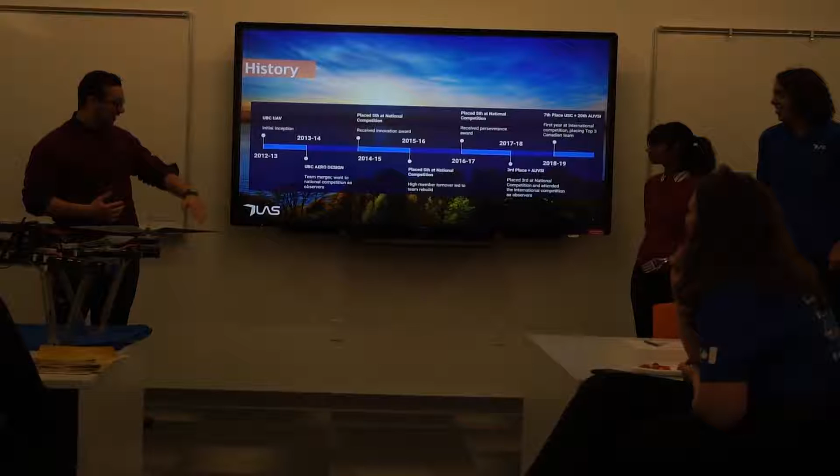It broke off of another design team here on campus, UBC Aero Design. After it broke off, it actually went back into Aero Design in 2013. So they spent a year on their own, went back in, and then decided to merge out again. That year, which was 2014, so ever since the 2014-15 year, we've actually been our own standalone independent team.

That year we placed 5th at our national competition and received an innovation award. Ever since then, we had a long run of successful competitions, placing 5th two more times, and then placing 3rd at nationals, and participating in or attending the international competition as observers.

So we actually had an aircraft lined up to go. We had an unfortunate crash, but we managed to get an overall look at the competition. From there, we participated in it for the first time just this past year in 2019, and managed to place in the top 3 Canadian teams internationally.

So now I'll pass it off to Karika, who will talk a little about our recent accomplishments.

These are some of our past accomplishments. Here's Desert Hawk, that's our fixed wing project from 2017. This is the project that Adam was just talking about, which crashed a week before competition, unfortunately. But we've got some more projects.

We've got Raven over here. This was a fully carbon fiber frame, booms, as well as propellers. The idea behind Raven was it was supposed to be a network relay, so all of our communications could be extended to a longer range.

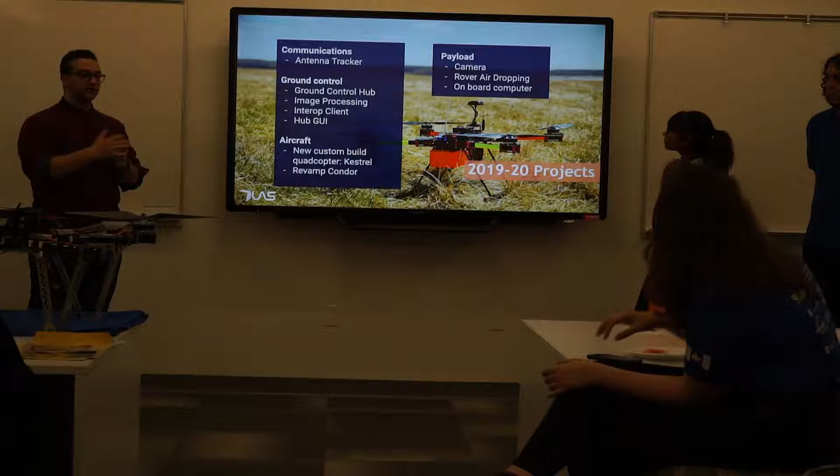But building off of that knowledge, we went ahead with our 2019-2020 project. As I said, we have our 4 sub-teams. Radio communications, which focuses on our antenna tracker. This is a device that allows us to use directional antennas to enhance our long-range video and image transfer.

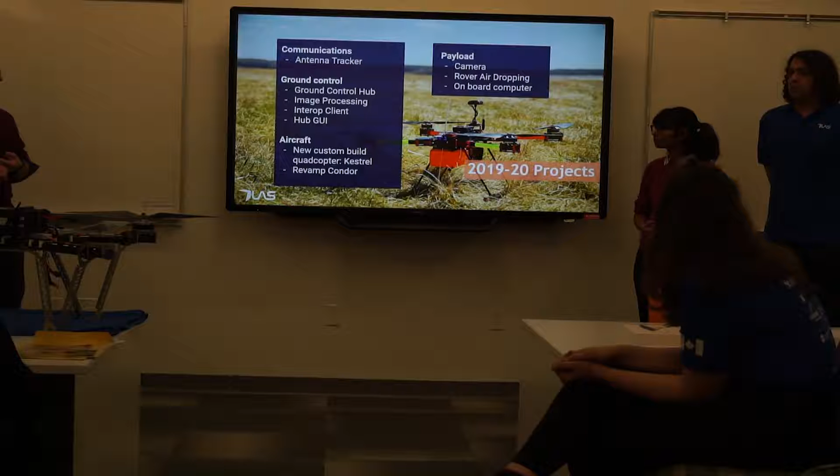We also have our ground control software suite. It handles most of our image processing, connecting to the competition server, and basically glues the entire system together.

We have our aircraft. So this year we'll be building a brand new aircraft named Kestrel, and this is to hopefully achieve the greater range requirements presented by our competition.

And on our payload systems, we'll be focusing on specing a lighter camera, having a successful rover airdrop, and as well that includes the winch, so the entire airdropping mechanism. We're going to be doing all that with our onboard computer.

We've got 2 very exciting competitions that we go to every year. We've got our Unmanned Systems Canada competition. This is the national one, and we compete against 14 teams every year.

This year, the scenario is really interesting. It's a medical emergency in the rural communities of Manitoba. The idea is the ground between the delivery location and the clinic is inaccessible by land, and so we want to deliver these medical packages.

We've also got AUVSI, which is our international competition. We've got another air delivery scenario in here. We're gonna perform 3 components in this competition. I'll talk about them in a second.

But the focus in AUVSI is basically on systems engineering and automation. The idea is at the start of your mission, you press one button and everything needs to be automated, and the whole system just needs to finish the mission by itself and successfully deliver the package.

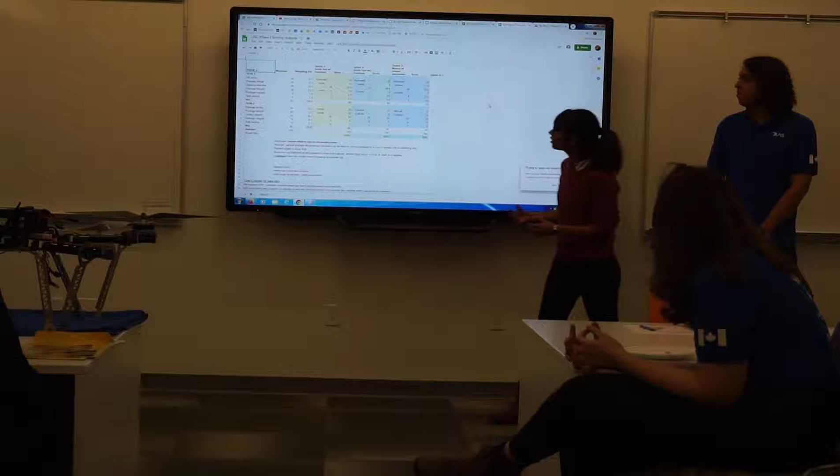And lastly, we've got an airdrop component. So we're gonna have an unmanned ground vehicle, a rover, attached to the bottom of the drone. The drone's gonna fly to a specific location, deploy the rover, and the rover is gonna drive up to the actual delivery location. So again, for USC as well, we do the same thing. We look at where we wanna maximize our points, where we wanna achieve autonomy, and where we wanna do tasks manually.

Of course, our aircraft team and payload team will talk about that shortly.

Awesome, thank you, Karika. So a lot of our projects that I spoke about earlier are drawn from the competition requirements that Karika just mentioned. However, with that, we encounter several design challenges within these subteams.

First, focusing on communications, antenna tracking enhances our radio communication. However, radio communication in itself can be a little unreliable at times, so it can be really tricky to work with. In fact, it's the most common component to fail amongst teams at competition. Luckily, we were able to create our first fully functional antenna tracker last year, so we're building off of that this year. However, it still proves to be quite the challenge.

With our ground control software suite, one of the biggest challenges we face is ensuring appropriate cohesion throughout the entire system and making sure that everything's integrated properly. This can be countered through a lot of mission testing that we do.

On our aircraft team, as Karika mentioned, we have waypoint flights, which have longer ranges. This year that actually increased by about 50%. So in that sense, reaching those longer ranges and being able to provide the appropriate power and propulsion to get there can be relatively difficult.

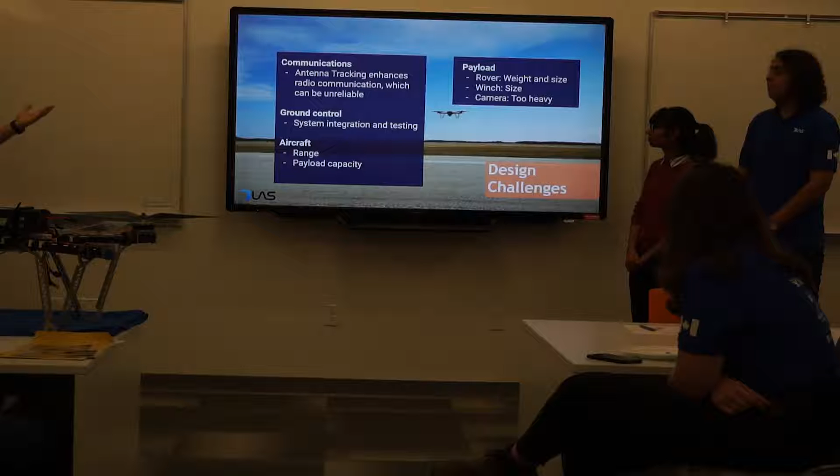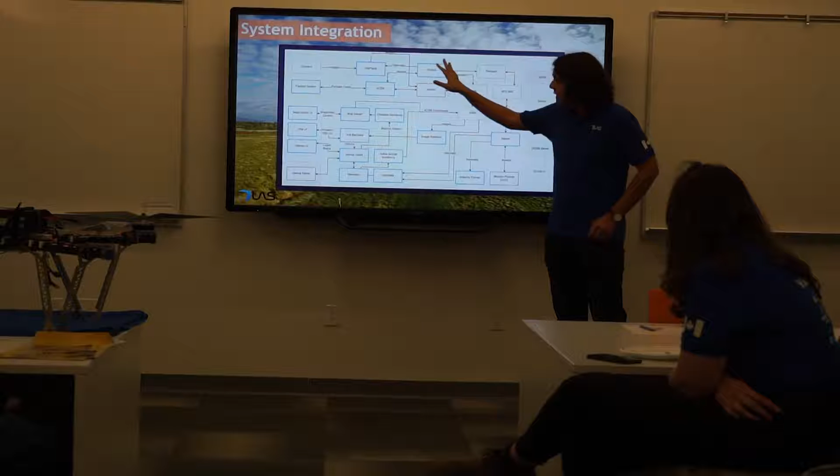So now I'll pass it off to Eric, who will talk a little bit about our system integration. Yeah, so I'm just gonna give a brief overview. Here is actually a stripped down version of our system map, and it's just all the little blocks of software that hold our system together, as well as their accompanying hardware components. So all the blocks in blue are pieces of software that we here at UAS create, and the non-blue blocks are either hardware or third-party software that we use.

So you can see up here is the most important thing: it's our flight controller. This is the brains of the aircraft, and we communicate through a proxy that we made called Skylink. It acts as sort of a proxy / translation service, and it allows us to get telemetry information from the flight controller, which is used by the antenna tracker to track its location, as well as in our ground control suite.

So our ground control suite is just a web server application that presents us with a few UIs and acts as sort of the central hub of communication between us, the team, our system, and the competition servers that we connect to. We also have all sorts of other utilities.

Called SkyPasta, which triggers the camera, takes the images, tags them with their information, and serves it to the ground. We have Air Command, which allows us to remotely control and guide the aircraft, in addition to what the autopilot already provides, and all sorts of other various telemetry and avoidance utilities.

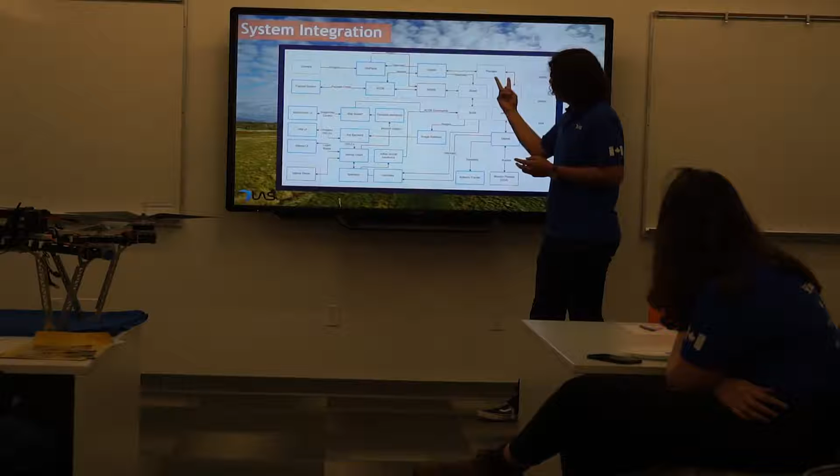And the big theme this year was redundancy. In the past, we've had communication failures, and since telemetry is such an important part of our system—it scores us points, it lets us know where the aircraft is and makes sure that it's safe—we've gone for 2 radio links. They run on different frequencies, they run on different technologies, but anything that uses telemetry can aggregate from both links so that we always have a fail-safe.

Thank you, Eric. So with that, that sort of concludes our introduction. I hope that gave you a brief overlook of what UAS is, who we are, our competitions, and what our focus is, as well as a little bit of an introduction on our system. So now, just before we hear from Oliver and our aircraft team, are there any questions I can answer?

Can all students of UBC participate? What if you graduate, do you just drop out of the team?

Well, on our team we're allowed unlimited undergraduate students to participate, and we're also allowed one graduate student. But technically, everyone on the team is a student at UBC from any faculty, so it could be business, arts, or applied science makes up the bulk of our team.

Awesome, so I'd like to welcome Oliver and our aircraft team, and they'll go ahead and talk about our aircraft team for this year.

And all the UAS members here. I'm Oliver, and I'm the aircraft lead this year, and these are my colleagues. I have Sean, Matterjot, Nick, Grant, and Sahil here.

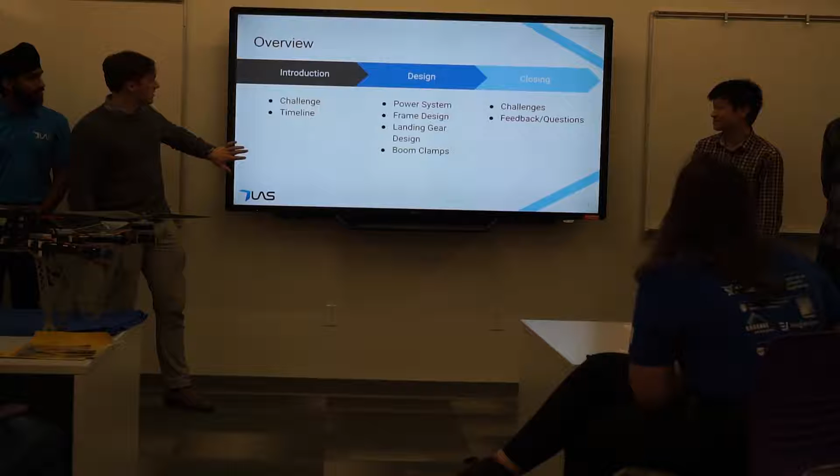So this is a brief overview of what we're going to be doing today. I'm going to start with a little bit more in depth about our challenges and specific problems we're going to be facing this year. Then I'm going to go into more of our detailed design. We'll have our team members introduce each of the parts that they're working on. And then we will also go into some closing, where we can summarize the challenge we're facing and get some questions and feedback.

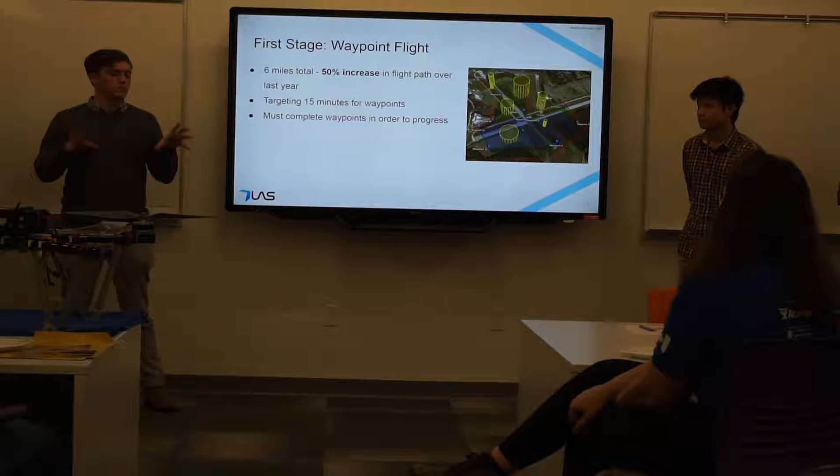So for the first stage of the competition, which is the waypoint flight, this is up to a 6-mile waypoint path, which is a 50% increase over our flight path last year, which was 4 miles. We're targeting 15 minutes this year to complete our waypoints, so we have enough time for the second 2 stages of the competition, which are the object search and drop. We must complete the waypoints in order to progress. We can't skip over these, and once you've done this, we'll have more time to complete the rest of the sections.

So for the second stage, there's an object search. We have a camera attached to our drone, and that's going to be looking for up to 20 objects, and there's 2 different types. One of them being a standard object, kind of a bright painted letter, and the other one's kind of an emergent object, which is typically like a person doing an activity of interest in the field. One of them is also located outside of the fly zone, so we have to have our camera be able to reach outside the scope of where we're allowed to fly. Then we have to get the GPS location of each object and a picture, and submit that through the interop server to the competition.

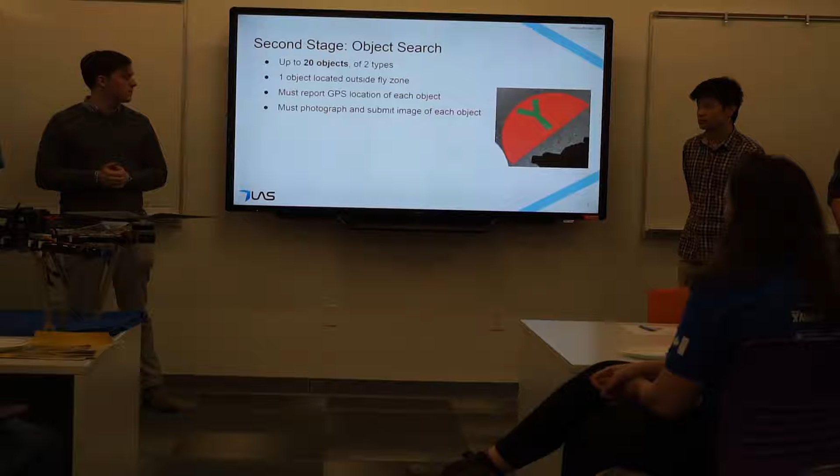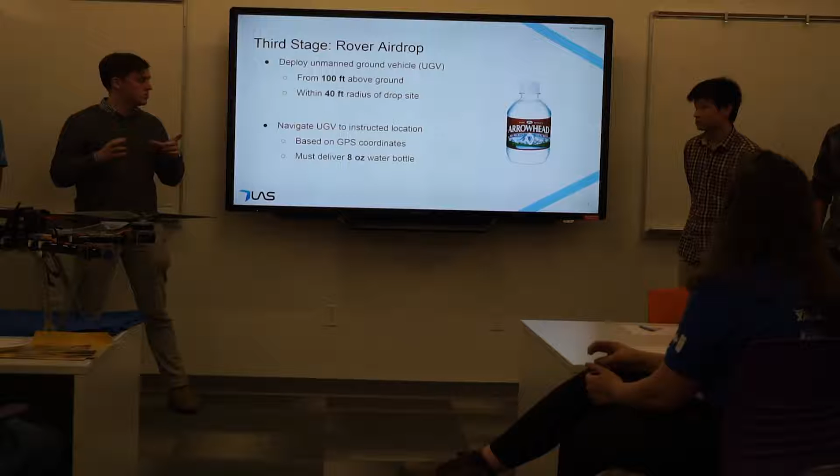From these competition requirements, we developed our own requirements. We need an 8-mile range, giving us 6 miles to complete the waypoints and 2 for the airdrop and object detection. Our focus this year is maximizing energy efficiency, which we'll achieve through the selection of our power system. We're also making it more efficient with an aerodynamic shroud to reduce our drag coefficient, and integrating the payload into our frame to reduce our aerodynamic cross-section.

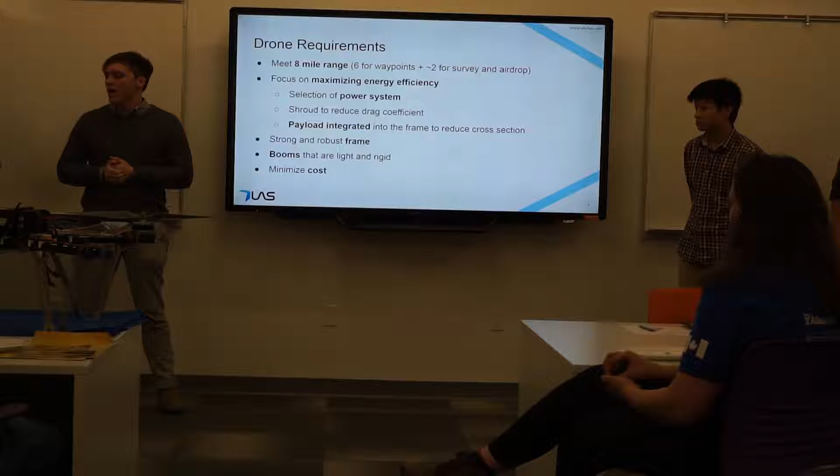We're aiming for a strong and robust frame, with booms that are light but also rigid to minimize vibration and provide predictable behavior for the flight controller. Finally, we need to minimize costs, given that we're operating on a tight budget.

This is a rough timeline for the year. Starting in September, we worked on selecting the main components of the drone. Through October, we worked on the general design, deciding the frame type, landing gear, etc. Now through November, we've been working on the more detailed design, which is the CAD of the frame, landing gear, etc., as my team members will discuss shortly. Then in December and January, we'll be manufacturing, doing the first assembly and flight tests.

In February, it'll be team integration—combining the payload, radio communications team, and software team—and we'll be working on our shroud that provides that aerodynamic shape. Then we'll move into mission tests, running the full mission, since a lot of our problems tend to arise when we try to integrate all these different systems. In March, we'll do more mission testing, integrate the shroud, and then head to competition in June.

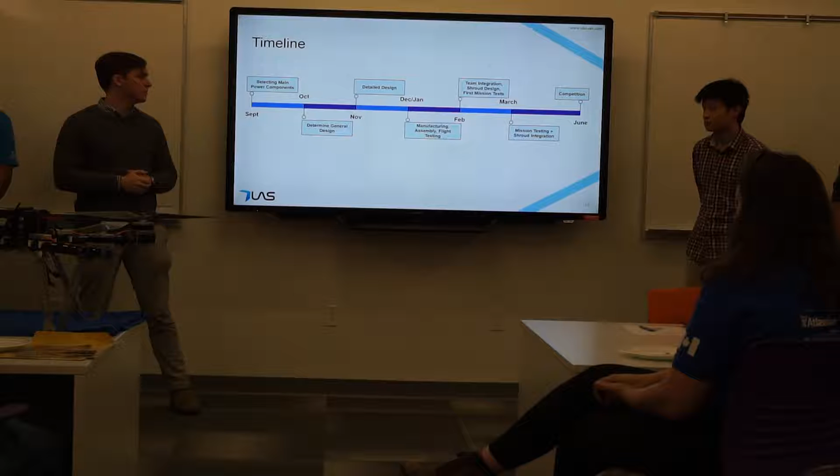Now I'll pass it off to Nick, who's going to talk about our drone components.

Before discussing how we chose our components, we wanted to give a quick overview of the different components that make up a typical drone we'd use. One of the main components is the flight controller, located on Condor right in the middle of these two batteries. The flight controller acts as the brain of the operation—it takes in all the sensor data from the GPS, gyro, accelerometer, and magnetometer, and outputs data sent to the motor and thus the propeller. Not only does it take in input, but it also sends data to the ESC, the electronic speed controller.

The electronic speed controller takes in data from the flight controller as well as power from the battery, and regulates the speed of the motor. We also have the power distribution board, used to lower the battery voltage since the battery we choose is quite large and has a large voltage. The power distribution board steps down the voltage so that smaller components can use it for telemetry, data control, and analysis.

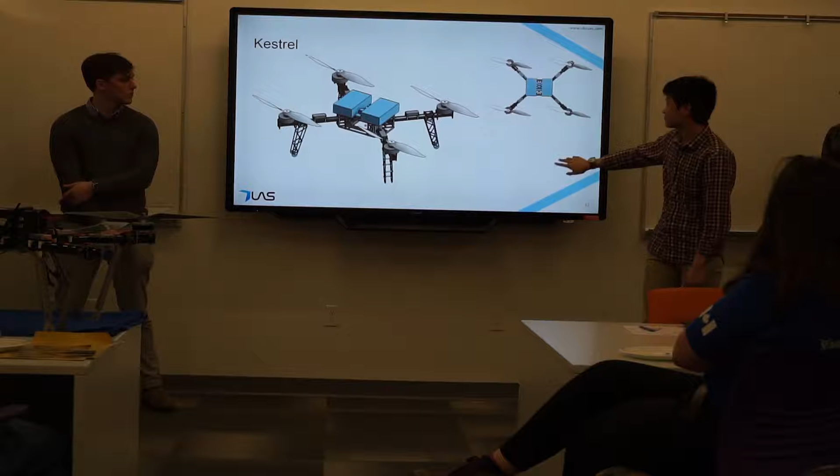I'll be talking about the different drone configurations we considered. We looked at two of the most popular drone configurations: quadcopter, which has 4 motors and 4 propellers, and hexacopter, with 6 motors and propellers.

First off, quadcopter: because it has only 4 motors with 4 propellers, it's cheaper to build and much lighter due to not having as many components. Also, because it has lower disk loading, it is more energy efficient.

Next up, hexacopter: with the increased number of propellers, it is able to reach higher speeds, and it can also lose one motor and still keep flying, giving us some redundancy, and it's more stable.

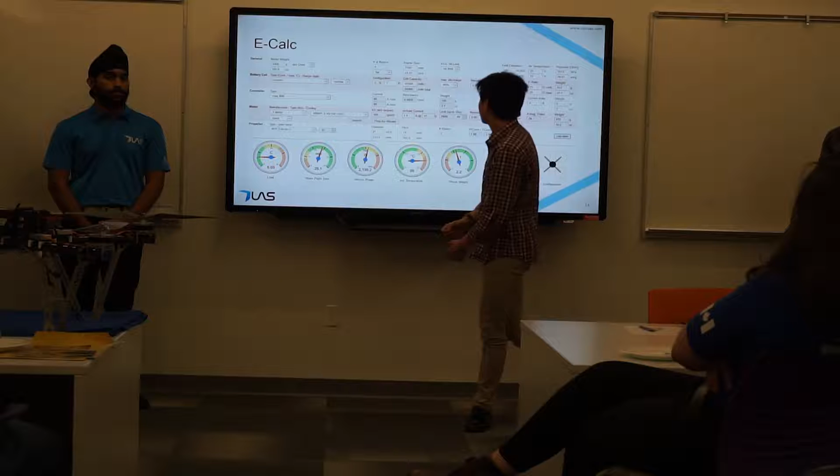The software we chose to analyze all the different configurations is eCalc. eCalc provides a friendly interface where you can enter all the different types of components, for example the battery cell size, different configurations, the motor controller, the motor itself, the propeller, and what it does is give a crude estimate of our flight time, the different temperatures, and the specific load that it can support.

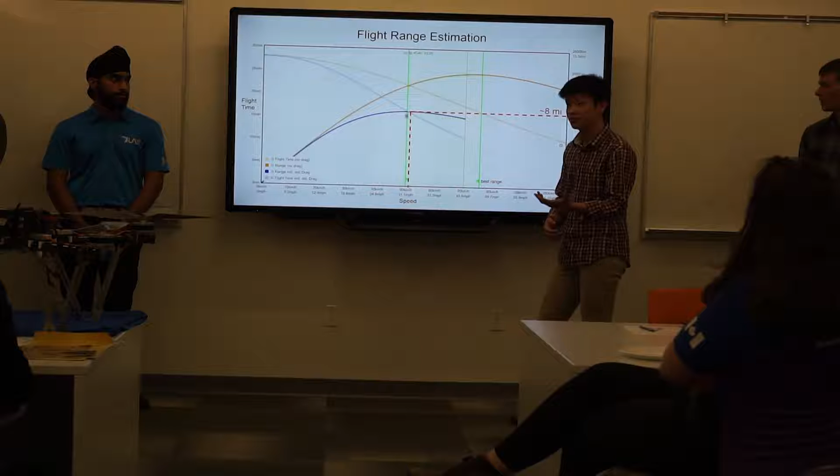So eCalc provides a very crude estimate of the range accounting for drag. The drag coefficient assumes the entire airframe is exposed and not aerodynamic, and you can still see that even with the non-aerodynamic airframe, we are able to reach a range of 8 miles given an average speed of 15 kilometers per hour. We also plan on implementing a shroud in order to increase the efficiency and hopefully improve that further.

So when building the drone, there are a lot of variables to keep in mind. One of them is the different types of propellers you can use. We broke them down into 3 categories: diameter, pitch, and the number of blades for the propeller. At a constant speed, these are the benefits each type of propeller gives us.

If we increase the diameter, it will give us an increase in thrust because there's more of the lifting surface, and because of the higher aspect ratio of the lifting surface, it will reduce the induced drag and increase the efficiency. However, rotating that propeller blade will require more torque, thus increasing the power consumption.

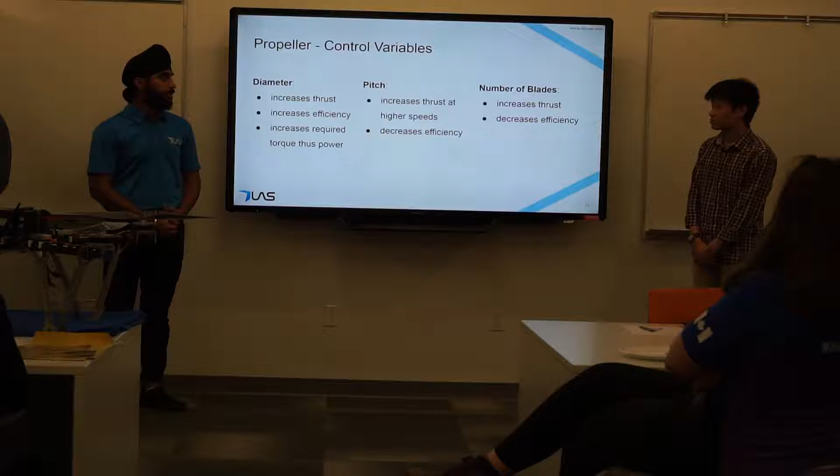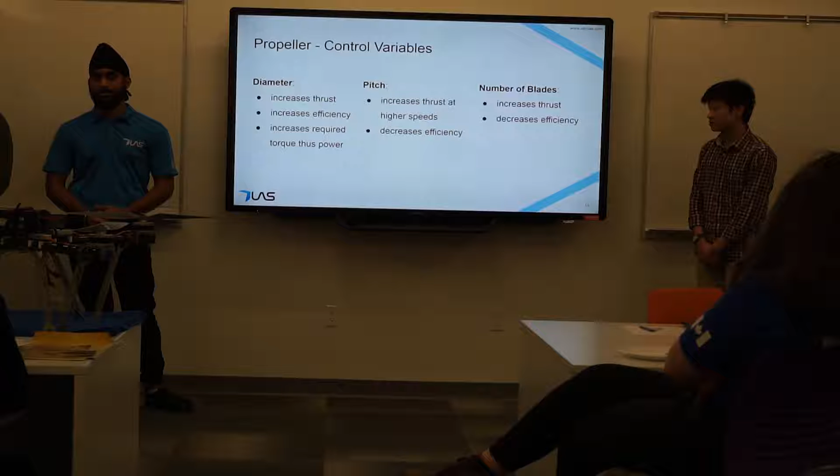Next up, we look at pitch. If we increase the pitch, it increases the thrust that propeller gives us at higher speeds, but it also decreases the efficiency of the propeller. Finally, if we increase the number of blades on the propeller, it gives us more thrust. However, it does so at a decrease in efficiency, because each blade makes turbulent air for the following blade, therefore decreasing efficiency.

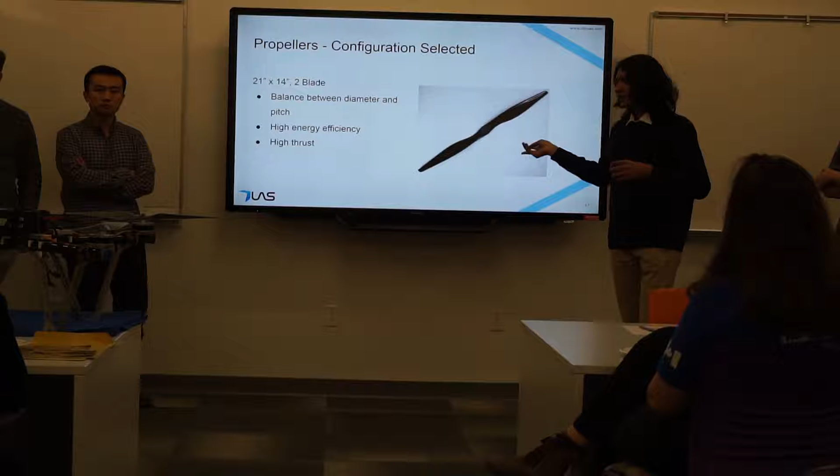When we're selecting components for a drive system, we first usually start with an initial guess for the propellers we want. We chose to use two-blade propellers for our drone this year because, as mentioned, two-blade propellers tend to be more efficient since they provide cleaner airflow to each of the blades.

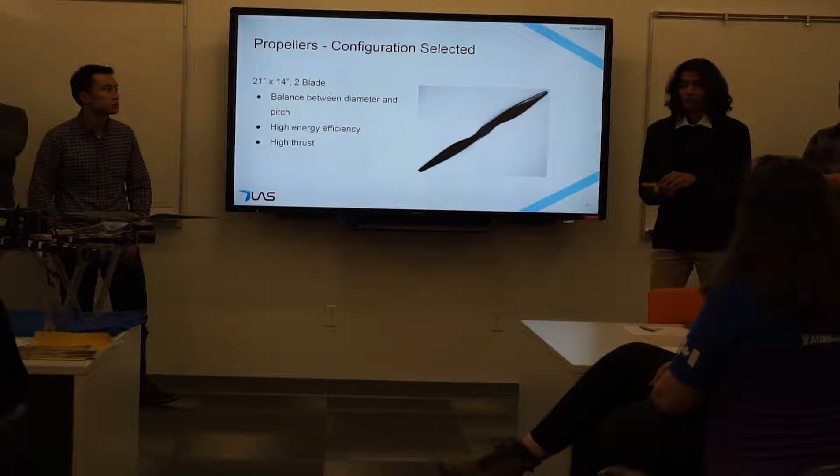Based on our design, our competition requirements, and our design requirements, we were able to determine an average flight speed that our drone needs to achieve to complete the mission. We approximated the final mass for the drone, and based on the approximation of weight and the flight speed we need, we could approximate the lifting force that we need for the drone to fly.

Using that lifting force and the data available for various propellers, we determined that a 21-inch diameter and 14-inch pitch, two-blade propeller, would be ideal to get the range that we need.

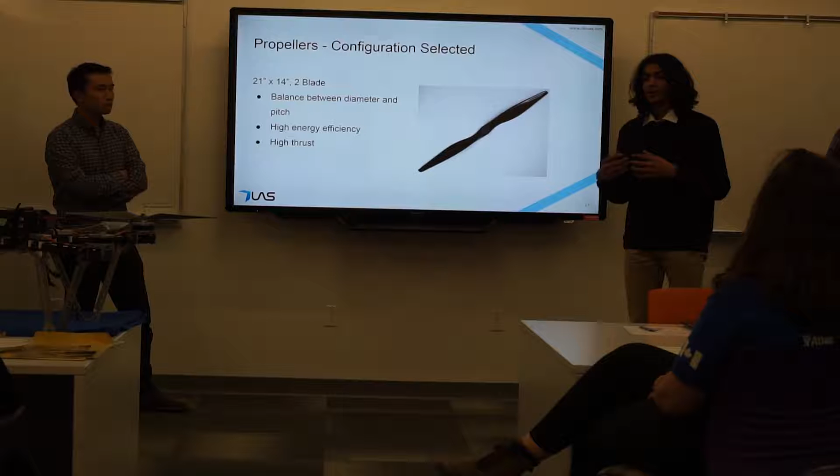Also, these specifications for the propellers were partially determined through eCalc, where we chose a propeller size, a certain battery, certain motors, and calculated the range it could give us, iterating through that to determine the ideal propeller size for a given drive power system. Yeah, so this turned out to be the ideal propeller for our range.

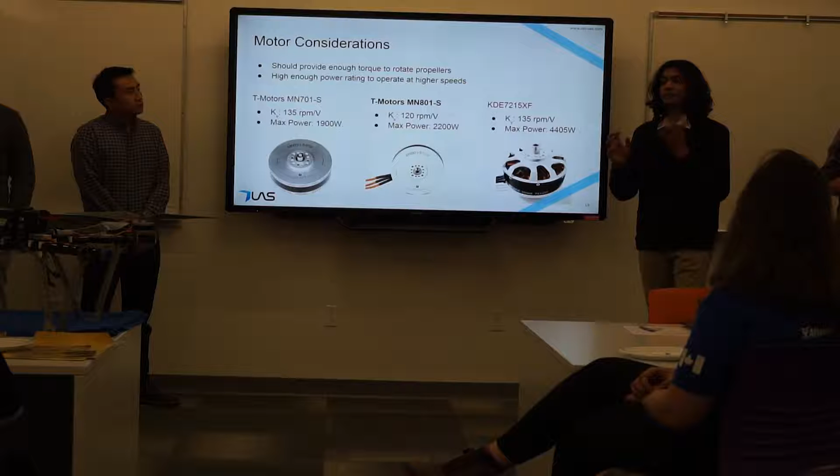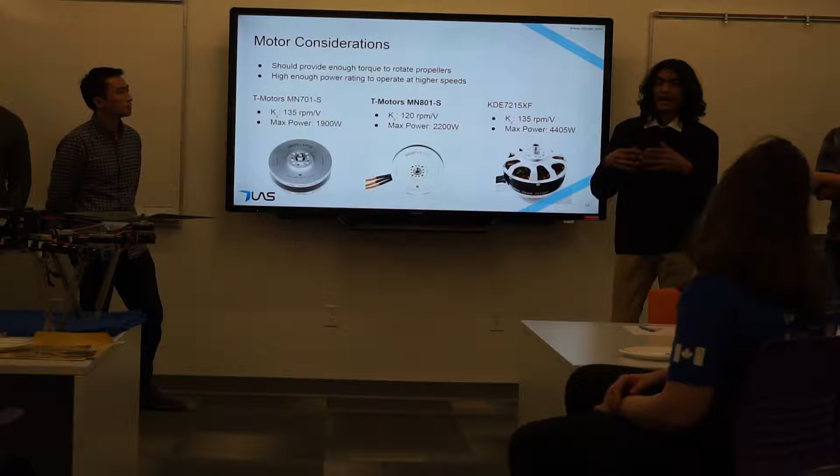So after a propeller has been chosen, we move on to choose motors. Since we have larger propellers for high efficiency and the large lift force we need, we also need large motors with high torque to power these propellers. With higher torque, we also need the propellers to rotate at a given RPM to provide the needed lifting force, which means we need motors with high enough power rating to get the range we need. These were the three motors that fit our configuration.

Since total flight time is something we have to consider, we chose the T-Motors MN801-S as the motor we'll be using on the drone, since it gave us the highest flying speed, cruise speed.

After we have the motors, we have to spec out the batteries and the capacity of battery we need to operate the motors for the given time and achieve the given range of 8 miles.

So these are three considerations that we had, and this is a 24 amp hour 12 cell battery. We chose LiPo batteries for their high energy to mass ratio and high energy density.

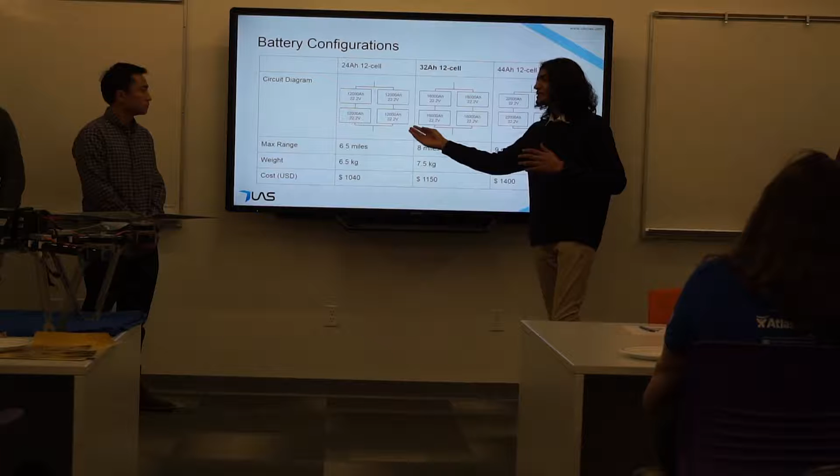Since we didn't have batteries produced that were of the size we need, we had batteries connected in parallel and series. Here we have two 12,000 milliamp hour batteries, which are 6 cells each, connected in parallel to get 24,000 milliamp hours, then connected to another 24,000 milliamp hour battery, also 6 cell, and we connect 2 of those in series to get a 12 cell battery.

Using this configuration, we got a max range of 6.5 miles, and the total weight for these 4 batteries came out to be 6.5 kgs.

Similarly, we had 16 amp hour batteries in parallel and series, and 22 amp hour batteries in parallel and series, which gave us these battery capacities. Something we noticed here is that adding battery capacity certainly increased the range for us at this point.

However, we noticed that as we move from 32 amp hours to 44 amp hours, the increase in range is just about a mile, but the increase in mass is about 2.5 kgs. So as we keep increasing the battery capacity, we also keep adding mass to the drone that needs to be lifted, which requires more battery, which requires more power.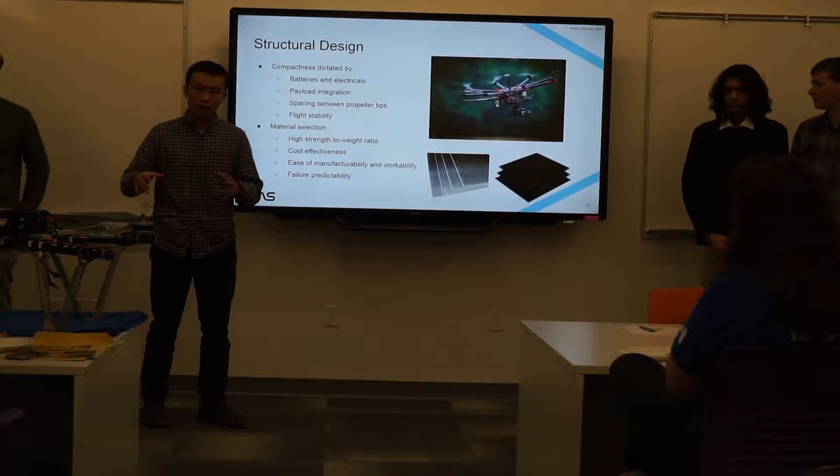All right, so next we'll look at the airframe and the overall structural system. After matching the power system to the specifications from the motor and propellers, that gives us enough speed to complete the mission in time. But at the same time, the overall size and compactness of the airframe will also affect the speed and range.

Realize that in forward flight, the thrust is working against weight in the vertical direction as well as drag in the horizontal direction. So our main target here is to be able to carry all the payloads while reducing drag, creating a very compact system.

The compactness is mostly dictated by large batteries, as you can see on the Condor, electricals, and various payloads. In particular, this year we're trying to integrate the rover or the UGV into the frame to eliminate drag.

That's why the drone frame will also be increased in size compared to Condor last year. In terms of overall size, the spacing of the booms needs to be carefully considered because we don't want any tip-to-tip interaction when the propellers are spinning at very high speeds.

Overall, the center of mass of the system and the center of lift need to be managed carefully to ensure that the flight is stable.

Another goal that we want to achieve as a team is to keep improving the overall structural soundness and material selection. Material selection is very critical in that process.

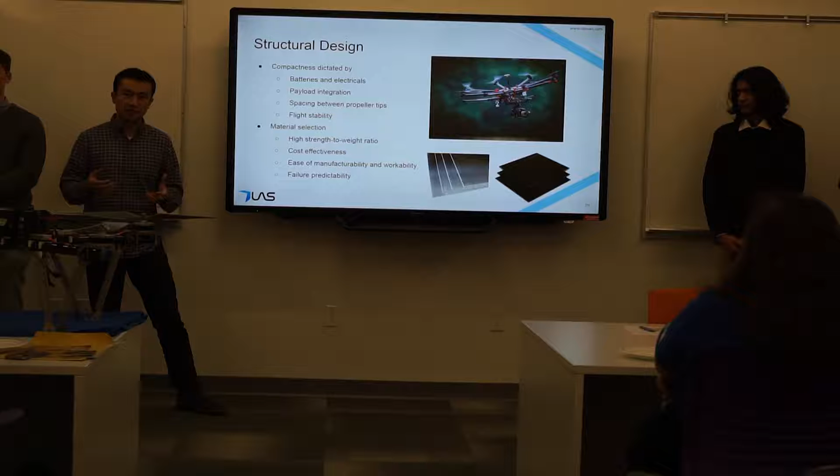There is aluminum alloy and carbon fiber sheets. These two are very popular materials in creating airframes for aircraft applications. Both have very respectable strength-to-weight ratios, but the team favors aluminum sheets primarily because it's cost-effective and very easy to manufacture for us in-house.

Also realize that carbon fiber sheets are composite structures that are hard to predict failures in, and overall analysis is more complicated. That's why we're going with aluminum alloy 6061 this year, the same as the ones on Condor.

So next we'll look at the frame design and what changes we made this year.

As we've iterated before, we need to integrate the rover inside the airframe. So this year we're going with a rectangular envelope that is 300 by 200 millimeters, elongated along the y-axis, creating a rectangular shape.

And we are continuing the success of using cutouts in all the plates. We removed up to 60% of excessive material while maximizing the strength to weight ratio.

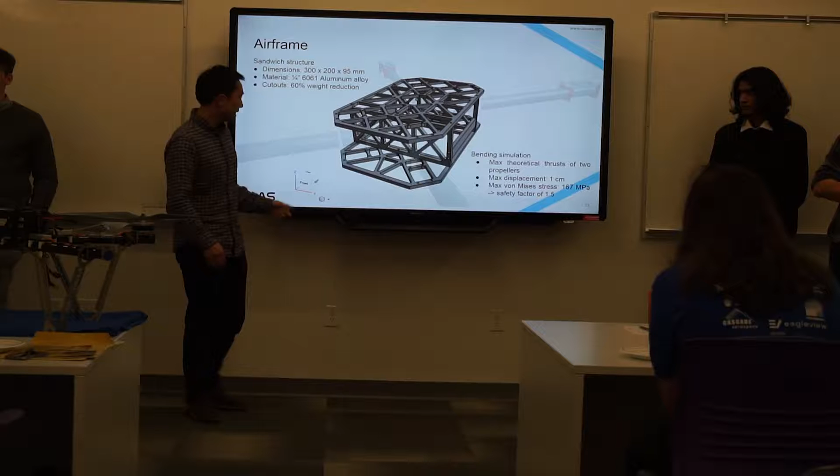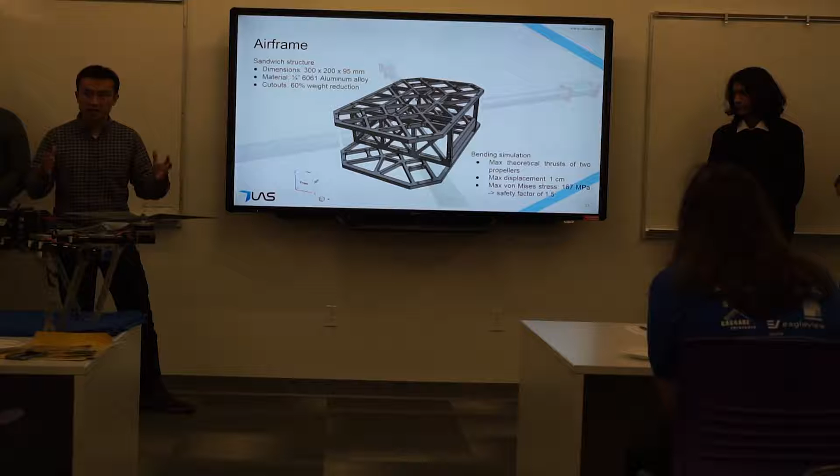We also put our frame through simulations to test bending and torsion. The worst case is bending the frame in the y-axis along its longest dimension. We saw that maximum displacement at the tip of the booms or the tubes is 1 centimeter, which we think is acceptable. In all the plates, the highest von Mises stress we saw is 50% lower than the yield strength of the aluminum alloy, giving us a safety factor of 1.5.

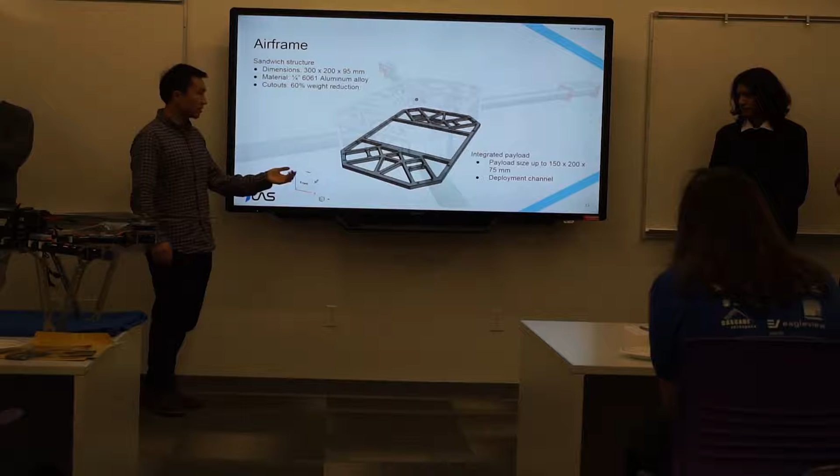This gives you a quick idea about how large we've allocated the space for payload on the airframe. It's 15 centimeters by 20 centimeters and just under 10 centimeters in height. Here we have this large channel for the air drop during the mission, the third stage.

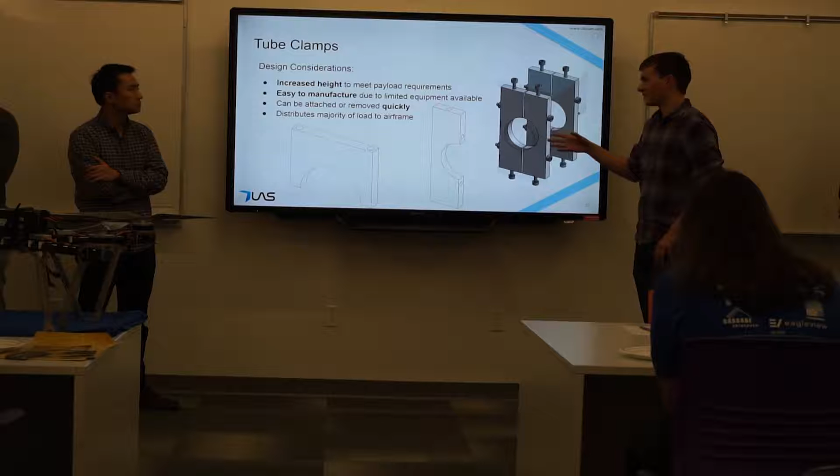One extremely major departure from last year is the tube clamps. As you can see on Condor, the tube clamps are clamped top and bottom. This time we're going with a side-to-side approach, because we need to make them taller in order to accommodate payload. Making them taller makes them more difficult to manufacture, which was proven to be a challenge last year with Condor even with the smaller height. We would have to drill farther, essentially, in order to just extend Condor's boom clamps.

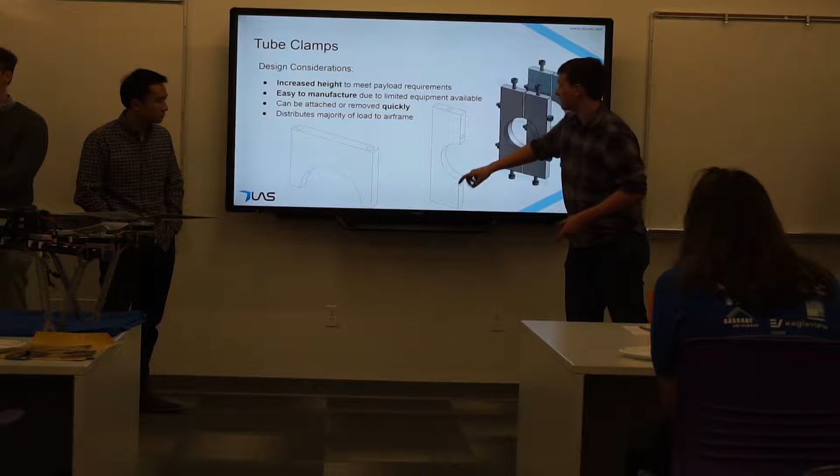It's kind of difficult to see, but there's a blind hole through the top and through holes through the sides here, as well as a blind hole down at the bottom. The blind holes will be holding the boom clamp to the frame, and the through holes will be clamping the boom itself. This design is also easier than Condor's because we can remove booms quickly and easily.

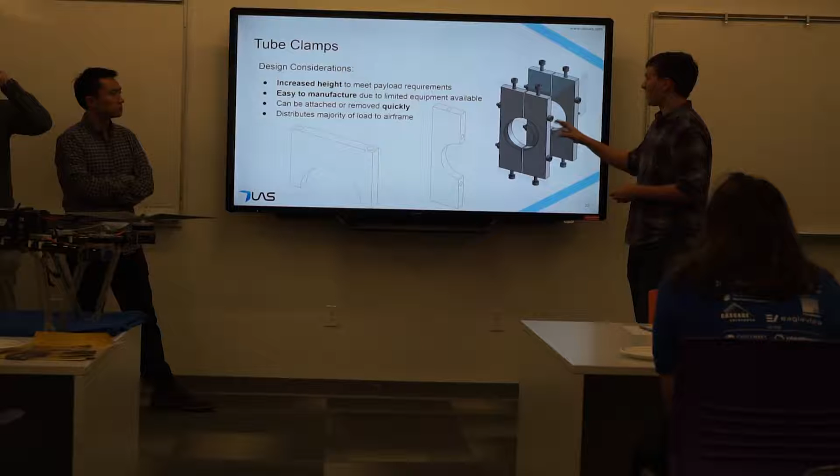With Condor, we kind of have to disassemble the frame a little bit in order to get the booms out. This will let us quickly test and pull booms in and out of the sockets easily. Through the test that Sean did, we found that it wasn't sacrificing the structural integrity of the frame by doing this easier to manufacture design.

Another component of the drone is the landing gear, as seen on Condor here. The landing gear helps the drone stay stable when it's not flying, and it also helps the drone land after a flight. So we identified five major design considerations.

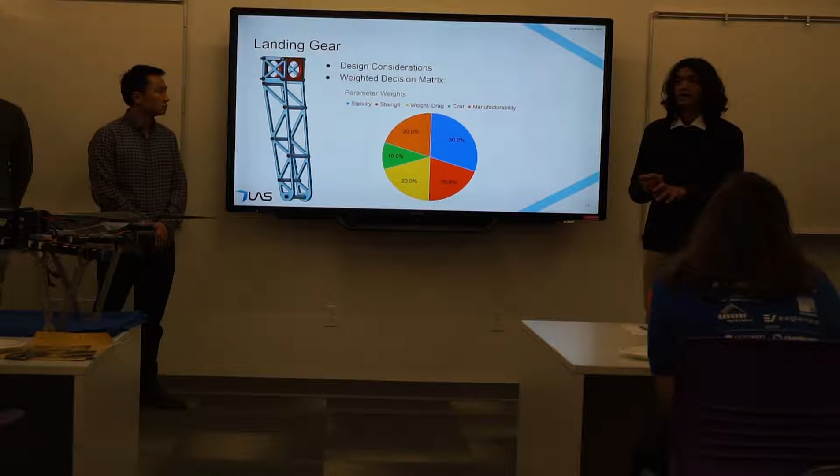The first was stability - it should be stable when it should be stable, and we wanted it to be stable on the fields, on grass, and on concrete, because we generally test our drone on the fields here at UBC, and we want it to be stable on concrete since our competitions are on concrete.

We also want the landing gear to be strong enough to handle reasonable drops from flying, or if something goes wrong and the drone drops from a reasonable height, the landing gear should be able to withstand that. Also, every time the drone lands, the landing gear undergoes some internal stress, and they should be able to withstand the fatigue cycles from these landings.

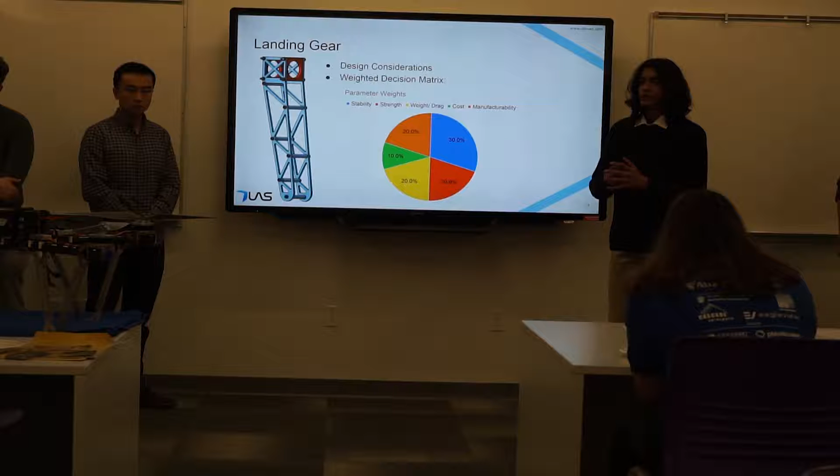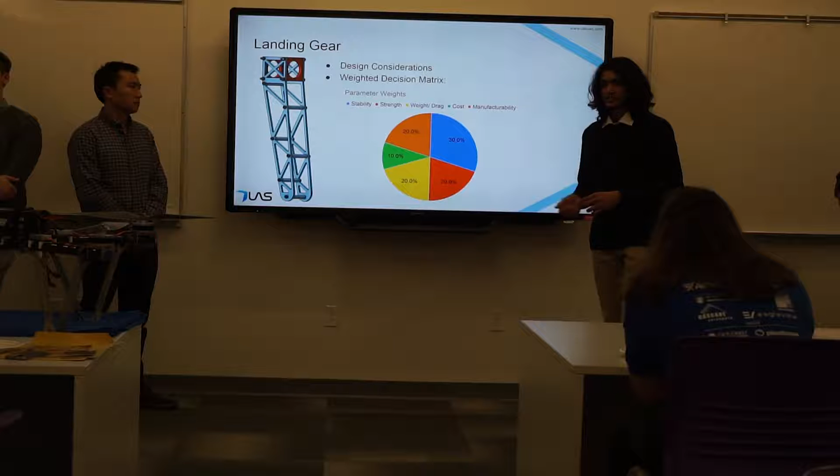Also, the landing gear contributes to the weight, in terms of mass and in terms of drag, because these landing gears tend to hang off the booms and create additional drag coefficients. So that's something we accounted for as well. And lastly, since we have limited resources, cost and manufacturability of landing gears was something we had to consider.

This gave us the parameter weights for conducting our weighted decision matrix, where the weights were determined by how important we believe each of the components to be.

So these are three design options that we had. The first one was having the landing gear we have on Condor for Newton as well. The second one was an embedded antenna.

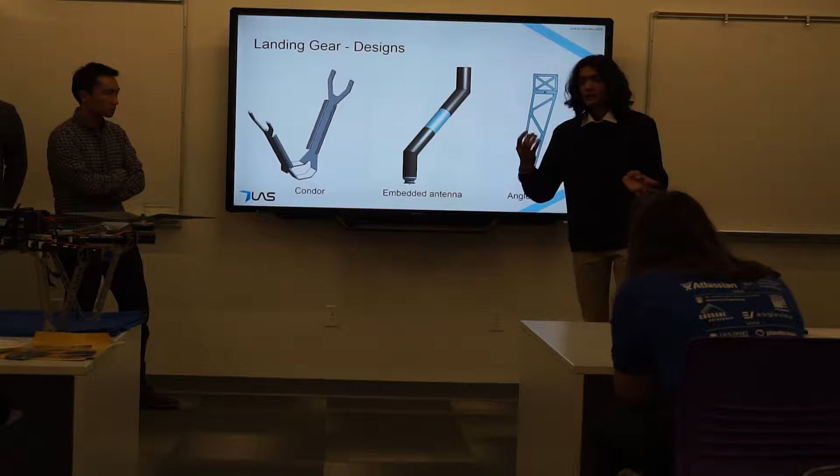On our drone, we have an antenna called the Bullet, and that antenna usually takes up quite a lot of volume. So to optimize for the volume, we were considering an option where we could have the antenna sit in the landing gear, and for that to work, for the antenna to be able to communicate, we would have to make the landing gear of composite materials such as fiberglass and carbon fiber.

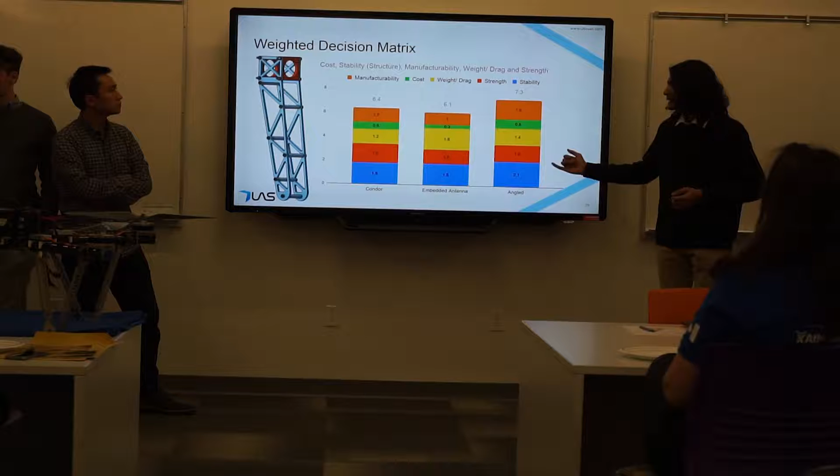And lastly, we had an angled design for the landing gear, as seen on the previous slide. So these were three designs that we considered. Considering Condor as our base case, we scored each of the three designs qualitatively on the 5 criteria we had, and we determined that the angled landing gear would be the best design for this year's drone.

To summarize the presentation, you can see our CAD model here. This year we're using a new landing gear compared to Condor. We're using a new frame with an embedded payload bay, and we're also using a new set of motors, propellers, and batteries.

Our main challenges this year are minimizing our weight, so we need to create a light drone that's efficient and able to complete the mission. We want to integrate our payload into the frame to reduce drag, but this has problems with coordinating with the other teams and ensuring everything works well within a deployment mechanism. Tying into that, we want to reduce drag with an aerodynamic frame, and that's a challenge we'll have to face down the line with how to integrate that into our existing design.

We want to have a reliable airframe that's able to withstand the typical operating stresses. And as I touched on briefly, we need to integrate with the other teams - not just payload, but also software and the radio communications. This is the crucial part of the whole competition: making sure we can work well as a full integrated system. Our final point is that we have to control our budget, as we operate on a limited budget, and we want to make sure we can achieve all of our goals.

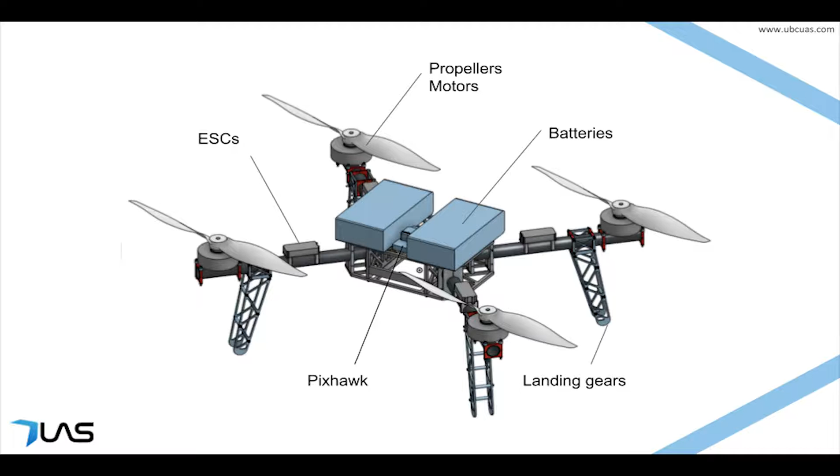It's kind of late in the game to entertain a wild idea like that, but it would be neat if you could do it. Do they have to be this high? What's the purpose of them being this high?

On Condor, the plate isn't here, but there was a plate here that held all the electronics, and then another one below that, that the rover was hanging off of. So you needed basically all this height. But on Kestrel, we're going to be doing an integrated bay, so we're bringing that height down a bit.

So you make that higher base so you could get the electronics in that box, or is that for the winch, or what goes in that core there? Yeah, so the box has the winch and the rover, or UGV.

But we could actually reduce the size more. Could you expand that center structure and bury the batteries in there? The more things you can get in that center structure, reducing the height of it, then you put your shroud on and you'll have much better aerodynamics, right? Yeah, that would be nice if we could do. We're already kind of pushing it with the height as it is, just due to the spacing between the plates.

That's something we looked at, but I think just because of the pure amount of battery we had, it wasn't going to be feasible this year. But I think that's something we would want to be looking at in the future for sure.

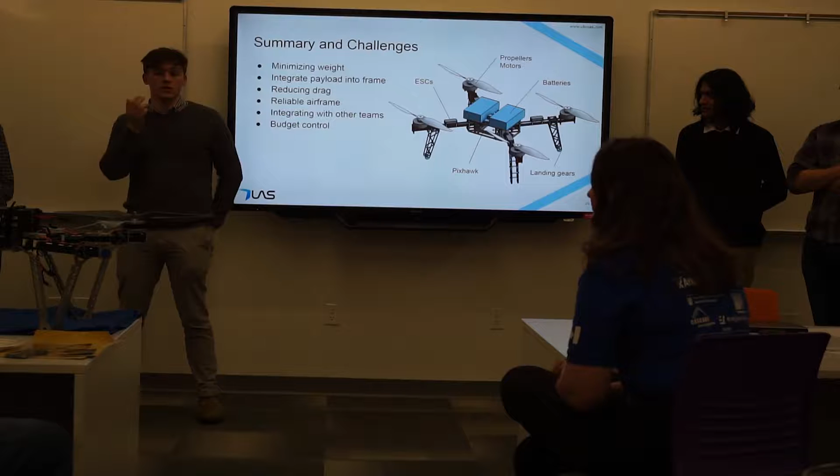But I think we definitely as a team want to get there very soon. I know some companies have started looking into structural batteries, where it's a very light frame and the batteries provide most of the support, and they can get really long ranges with that. But, yeah, that's a little scary. The first step is just get the mass where you want the mass, right?

And I guess I would challenge you on the carbon fiber, but I know if you don't have the resources or the experience, it's kind of a new area, but you can. Modern aircraft have a lot more carbon fiber for the reason you can't beat the stiffness to weight ratio, you can't beat the strength to weight ratio.

So, but it's a different technology. So you're going with aluminum. Why did you choose 6061 versus say 7075?

7075, 2024. Yeah, so we looked into that. That may be something we consider down the line. It's a little bit harder to work with, more expensive. To be honest, we have a lot of aluminum 6061 already. So then I think we just found the gains were kind of marginal.

Not marginal, but they weren't that significant. But I think we might look into rebuilding the frame later in the year if we have money left over. Well, I mean, yield on 7075 is what, got to be 50% higher? So I looked into that last year on Condor, and 7075 obviously has a much higher yield, but I found that we're mostly interested in stiffness, and 7075 doesn't have better stiffness for same construction.

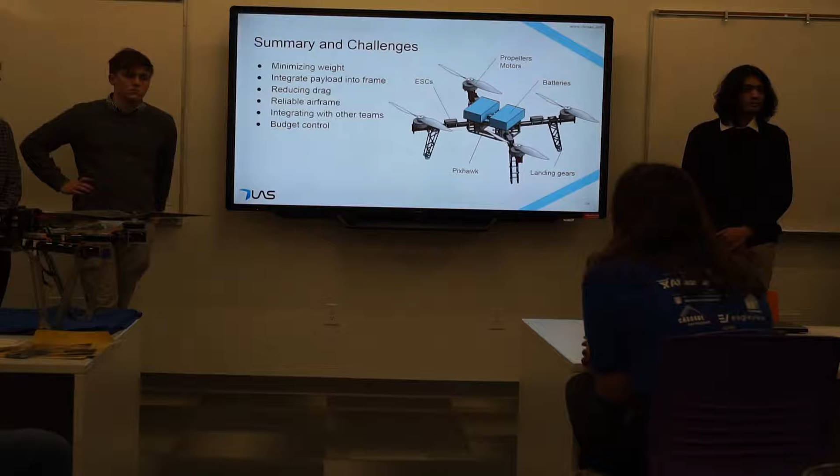So there's two things to balance there. Yeah, they definitely can be a little bit closer to the body, and they probably should be. But the other thing to consider is often, mostly in our Canadian competition, it's quite windy on the flight line, and having a wider base gives you a lot of stability in preventing the aircraft from rolling right on takeoff. That's kind of the most likely point that you roll, and I think 2 years ago, half of the teams tipped over right as they were taking off. We learned quite quickly that a really wide base in your landing gear is kind of the easiest way to prevent that.

That actually might be one of my questions from before. We were talking about your 1.5 times safety factor on the stress of the body. I'm sorry, I didn't catch what the load was that you were basing that around. Was it your cargo payload or some sort of shock load crash landing?

Yeah, so we did some preliminary FEA analysis. Basically, we consider the worst kind of bending case, which is fixing these two booms and then really bending this upward really hard, putting a lot of stresses on the frame here. The load we used is actually the maximum theoretical thrust provided by the manufacturer, and those actually use even bigger props, so much larger thrusts are generated. We use those forces, while in reality our forces will probably be far less.

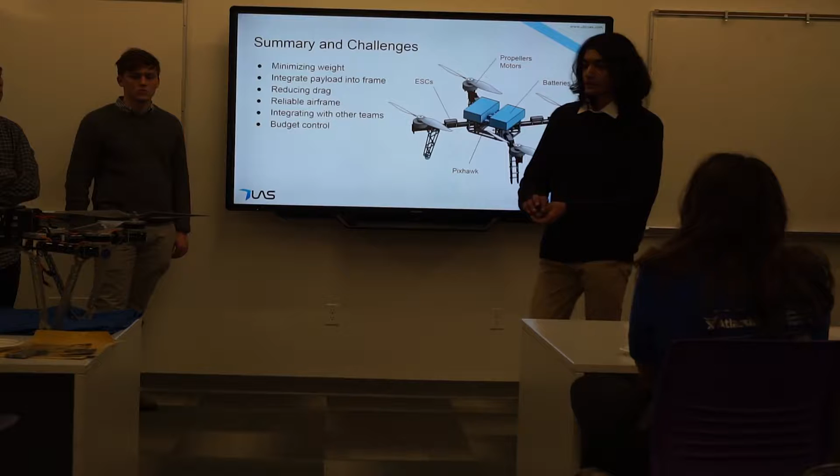How would that compare to the shock of it dropping, say, from the height of the table onto the ground horizontally? I think we did some dynamic tests on the landing gear, where we did dynamic tests to see where the stresses would be divided if we fall and drop from 10 feet. So consider the velocity that we have just before drop and conducted a dynamic test for that. And it's usually the sides of the landing gear that carry the stress, and the booms where the stresses are transferred.

So you're saying the body isn't the weak point of that? Yeah, the body, the clamps have some stress as well, but the internal frame doesn't. I think in the worst case scenario, it's going to experience the most amount of stress right here. Then this is going to just bend and deform a little bit, and that still gives us usability.

Yeah, on that maximum thrust, that's basically considering the scenario where we're going at max speed and then you want to stop or make a hard turn, because that was where we had the problem with our drone before this one with the deflection. So what does that work out to, how many G's?

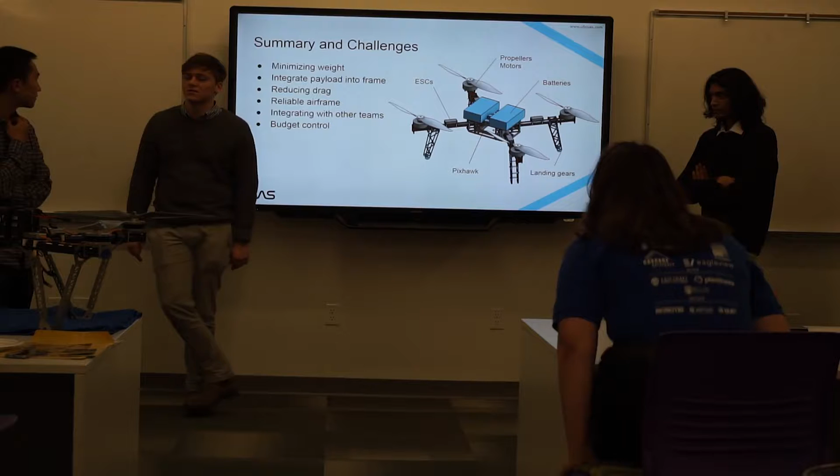What's the maximum, have you worked out a flight envelope? I don't think we did the G's yet because we'd have to do a more full simulation to get that value. But like you said, we just considered basically if it's delivering the maximum amount of thrust that it possibly can. I think we have our flight controller basically maxed out in its acceleration, and I think we get about 0.2 G. Not a lot.

Yeah, it's just that you're going to have maneuvering loads from the flare, and you're going to have lift from these, and you're going to have the inertia of that. Like typically with a helicopter, you're around 3 Gs as kind of the maximum you need to withstand in maneuvering. So you'd want to make sure that if I had 3 Gs in the center there, is that going to withstand that? The landing loads is a separate case altogether.

Is that from your drop test, figuring it out? But again, the loads are going to be different, because the G force is different when you're maneuvering versus when you've got landing loads. Those are 2 separate cases. Yeah, we definitely should do more dynamic tests. But so far in our bending test, we sort of just put all the weight on the center plates and then the thrust on the booms for now. But yeah, we should.

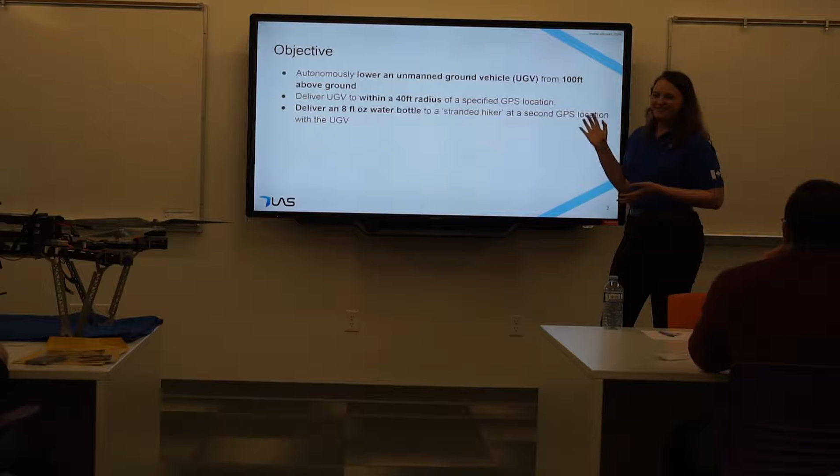Once the UGV has landed, it must autonomously go to a second location, delivering a 250 milliliter or 8 fluid ounce water bottle to a stranded hiker. You see a lot of Imperial units because this competition takes part in the US, so I do my best to convey metrics that are applicable.

Going into this challenge, we had a few priorities that would affect our strategy. Each year at competition there's been around 75 teams, this year there's 150, and we see a very low completion rate of the missions. Just getting the mission completed will get you points and get you high up on the scoreboard. We'll easily land in the top 50% of teams just getting 1 point for the mission part.

We have about 8 months total to design and build the system. We're trying to condense that to 4 months so we can focus on testing in the second semester, so heavily time limited. We wanted to focus on having something that works first before something that works perfectly. I think a lot of students fall into that pitfall of making the perfect design on CAD before trying to implement it. That's what led us to being prototype focused. We wanted to make sure the system was working, iron out any kinks, so we weren't making invalid assumptions, and just fail early so we could be successful later on.

The final priority we have is to add some UBC UAS flair. We're lucky to be a student team where we can take high risk choices and decisions in a low stakes environment, so we really wanted to use an excuse to exert some creativity. We can't expect to win and beat every team if we're doing the same thing as them, so we definitely wanted to bring a novel aspect to the design for our own enjoyment and learning experience.

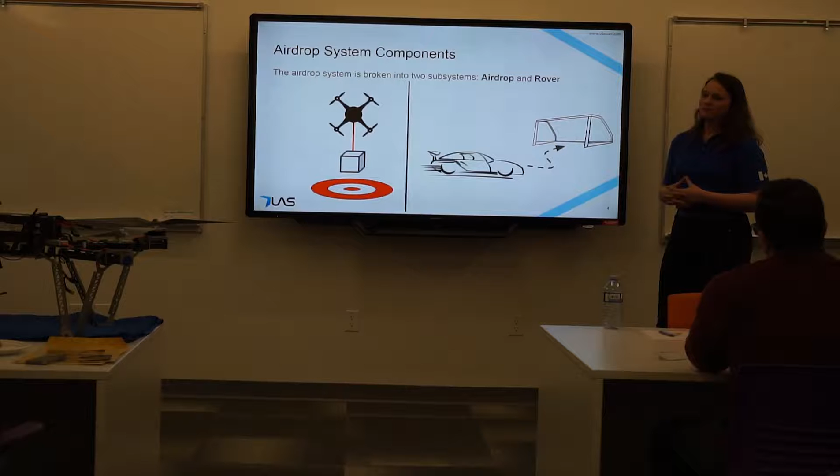And then the second one would be having a rover that once it's on the ground, it can travel to a second location within about 10 minutes, and it autonomously... Going into this presentation, I'm going to break it up into the design process for the airdrop and the design process for the rover separately, because they're quite separate.

We broke down the airdrop requirements based on the rules and some restrictions we had as a team. We wanted it to drop at no more than 1 meter per second. We estimated the rover's capacity before breaking would be 2 newtons, so the impact force at 1 meter per second would be 1 newton. We added a safety factor since it was a crude assumption. The rules state the UGV must be functional when it hits the ground to get points, and functional means it can move as intended. The water bottle must remain intact, as delivery is the essential part of the scenario, so it needs to be working for us to get any points despite drop accuracy.

We also wanted to reduce the drop time. We've had similar airdrop projects in the past and used that as a benchmark to improve upon—our drop time then was 30 seconds, so anything better is worth pursuing. There's no actual restriction in the competition rules for how fast we need to drop it, but if we take too much time, we're taking away valuable flight time. We have about 30 minutes total, so those few seconds could be used to identify another object and get even more points higher up the scoreboard, because near the top, a few points makes a huge difference.

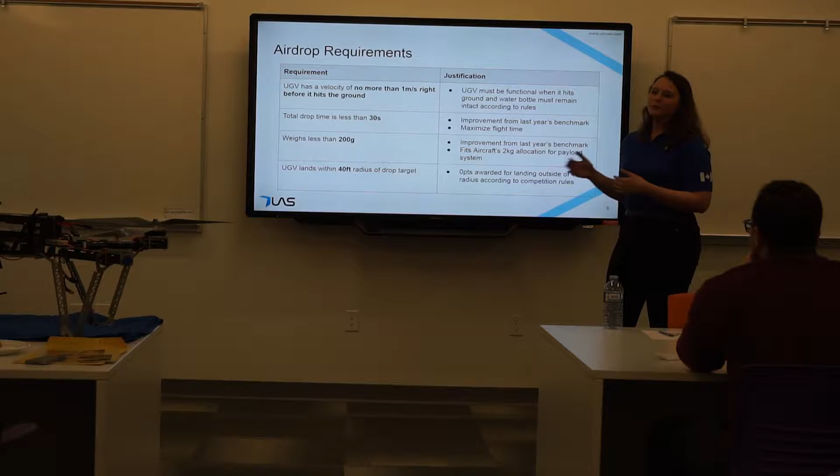It also needs to land within 40 feet—that's the 0 point mark if we're beyond that. To get 100% of the points, we have to land within 5 feet. So obviously that's the goal, but getting some points is better than nothing.

Here are some of the most competitive concepts we considered. The motorized spool is a concept from previous years, where the motor creates resistance in unwinding the spool, running in reverse to the way it naturally wants to unwind. Once the payload is released, we want to reel it back in, because as we get to the last few rolls around the spool, it loses its grip, so the rope has to be fixed to the spool and reeled back in.

The friction braking idea is a novel idea this year, where we place a rope between two braking pads. We have exactly 100 feet of rope stored, and once that falls through the pads, the drone is able to fly away without having to bring the rope back in. We would control the normal force on the rope using a linear actuator, which controls the friction and slows it down.

The other concept that was competitive was a parachute. This is something we actually tested last year—it's pretty self-explanatory: you release the rover and hope for the best.

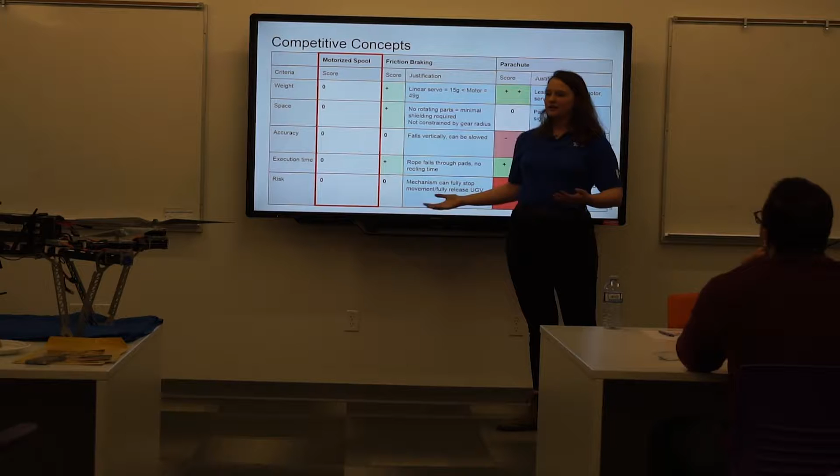Here's a brief summary of our evaluation process—this is a compilation of some of the weighted decision matrices and other evaluation tools we used. This doesn't account for the weights of all our criteria, but we can see some ideas are a lot more consistent than others. We set the motorized spool as our datum, since it's something we've actually manufactured in the past. The friction braking concept is stronger in a lot of aspects, mostly the weight.

A linear servo that we had spec'd out was 15 grams versus the 50-gram motor that the motorized spool used, so there's a considerable weight savings there. And as well, the execution time is essentially halved, because once it falls through, the drone can fly away, you don't need to reel it back in. And the space as well, you get a lot more compact, because there's no rotating parts.

You actually don't need to shield it, you don't need to worry about rope getting caught, or dust getting in there and ruining the efficiency of it. And also, when we use the motorized spool, we have to get a rather large torque, so we had to use quite a big gear, which was bulky.

In comparison to the parachute, it's very strong, but it's also very weak in other aspects. So the parachute is obviously one of the lightest ones. You would only need a release servo, which is 9 grams compared to the other ideas, and you would use less rope and material to hold it into the drone.

And the drone can take off as soon as the rope is released, the parachute is released, so you don't have to wait for it to fall to the bottom. It's a matter of seconds before it's gone. But where it's weakest is that it's completely pure luck as to whether it gets to where you want it to go. It depends on the initial trajectory and the weather that day. It might hit a gust of wind.

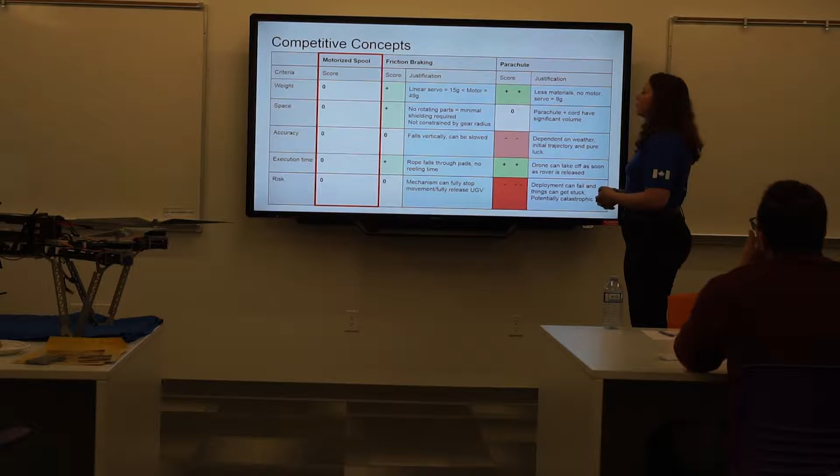But I think where it fails the most, where it matters the most to us, we've got three minuses here, is that in testing last year the parachute actually deployed early. And we got very lucky that it broke off and fell straight to the ground.

I think Adam can attest to it a little bit better than I can. But it actually got sucked out of the compartment or something, right? Yeah, so it was that the container that was holding the parachute, a bit of the parachute actually kind of slipped out of the container, and then it caught and came out.

And lucky for us, it was kind of attached to the aircraft through a key ring, and then there was an actuator that let that key ring go, so the key ring just snapped, similar to a standard key ring. But that sort of gives you an idea of the amount of force that literally snapped that key ring. So if it hadn't been for that, it could have pulled down the whole drone. So that was lucky for us.

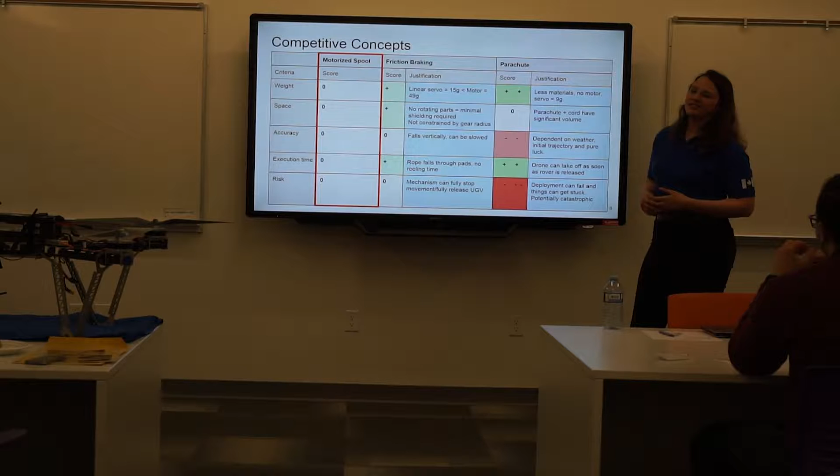But yeah, a big concern would be getting the cord stuck in the propellers and bringing the whole drone to the ground, and that's the absolute worst failure mode we can get out of this. So even in testing, it was not worth pursuing a risk like that. The difference with the parachute is that the risks or downsides are inherent to the design, that there's a lot of drag, so there's a lot of force on it that can do all sorts of crazy things.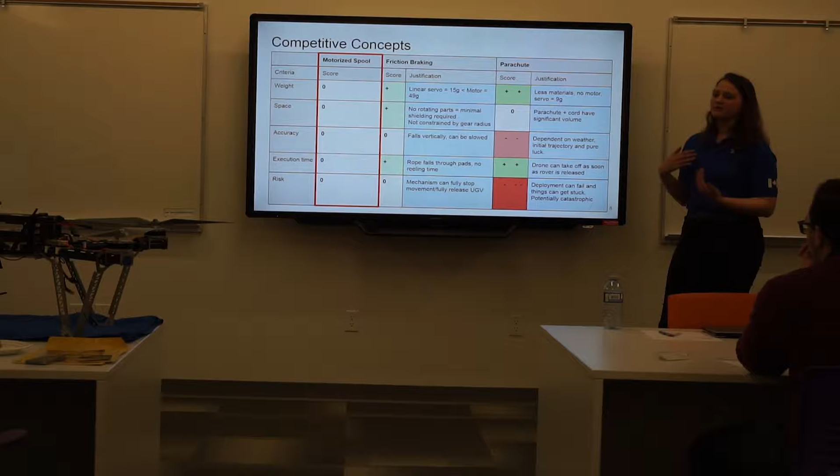Versus the weakness in the novel friction braking design, which is that it's not tried and true, and so it takes a lot more effort to get it to a working stage. But that was a risk we could avert by putting in more effort. And quite frankly, we were more excited too, because of the novel idea.

So sticking to our prototyping philosophy, here's the prototyping evolution we've done over the past few months. This was our very first iteration. You can see a couple of rubber pads, I think this is EPDM, and we put it together using a rubber band, which would be our normal force that we were controlling with the servo.

Through this, we found out that it's possible to create enough friction by using the pads and rubber bands to hold the 1 kilogram mass. But we actually realized that having the spring force and tension wasn't accomplishing what we were trying to do in increasing the normal force, because this setup relies on contact between the rope, and once you pull it apart and release the tension, you're just going to lose the contact and lose friction altogether. So we realized quickly that it's possible, but we need to do compression.

So that's what spawned this preliminary design. We actually did it using laser cutting, thanks to Xavier's laser cutter, and Luke's time.

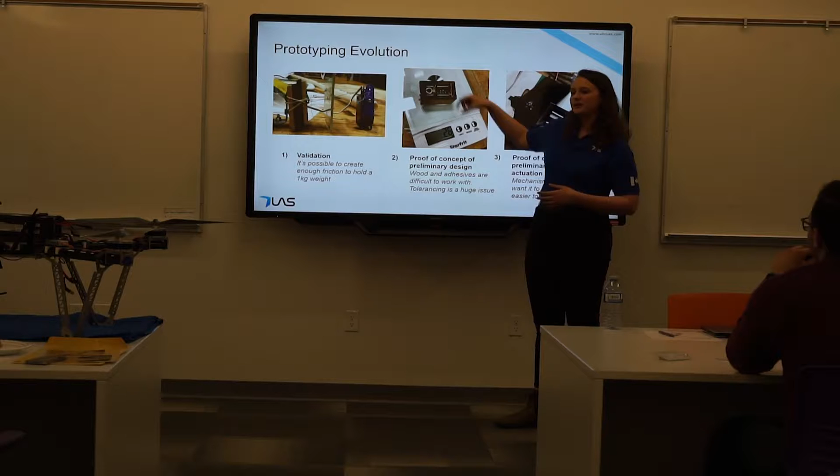So we actually laser cut some panels and put it together. We used a lot of epoxy here. We found out that tolerancing was a huge issue, that we were constantly having to re-drill holes because we couldn't really account for tolerancing when we were designing it, just because we were remote and don't have the time. We ended up having to use a lot of epoxy filling gaps because we didn't quite have the contact we needed. Re-drilling holes, things were stiff, these plates were a little bit too stiff on the inside walls, and epoxy was getting everywhere, and wood and epoxy is a very difficult combo to work with.

So moving on from there, we are continuing with 3D printing and plastic, just because it's a little bit easier and it's quick and it's cheap.

And so here was us getting the mechanism to work. It worked like we wanted it to. You can see it's quite heavily strapped down, and that's because it was a little bit weaker than we expected it to be. So these are some of the things that our final design addresses, but it works. We actually did hold up a 1 kilogram mass with the linear servo at full extension. So at this point, it would just be a case of tuning it and getting the normal forces that we want.

Okay, so here is our design going forward into the final manufacturing phase. So here's the inner mechanism that you've seen working. We've got the compression spring, we've got 2 pads, and we've got stainless steel rods here just to act as a bushing, or to reduce the friction between the sliding plates. And then we've just got bottom and top plates to hold everything together and stable.

And in this final design, we've also got some, you can see it at the back, this is a section view, but we've got some walls to kind of shield the sliding plates just a little bit. So that's in terms of the structure.

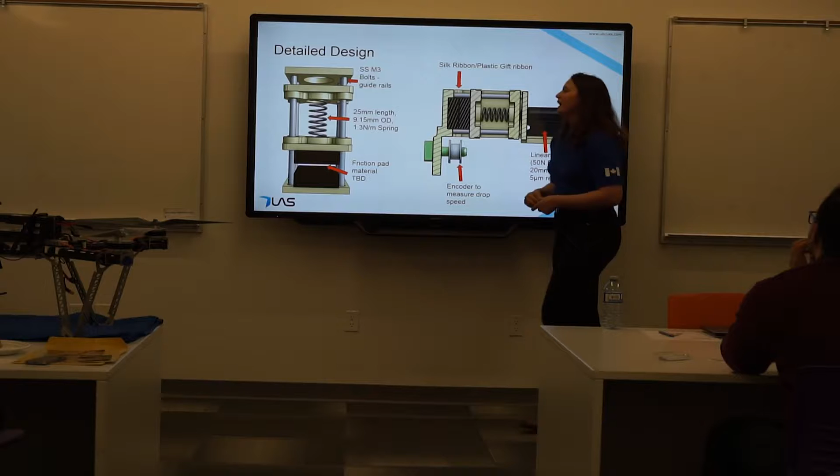So we used that to calculate our spring, which would be more than we wanted it to be, not too much more than 20 millimeters for space savings, but it had to be long enough. And the spring constant here does match the 50 newtons over 20 millimeters. We wanted to make sure that the outer diameter was significant so that we had some sort of a minimum constraint in that it wasn't going to rotate and bind on the rods here.

Yeah, so this is our design moving forward. We are still, in terms of materials, looking at what friction pads to use. So in our testing, we've used, oh, wrong way. So we've used EPDM, and here, I can't really see it, but there's acrylic. So we've tested a little bit of both.

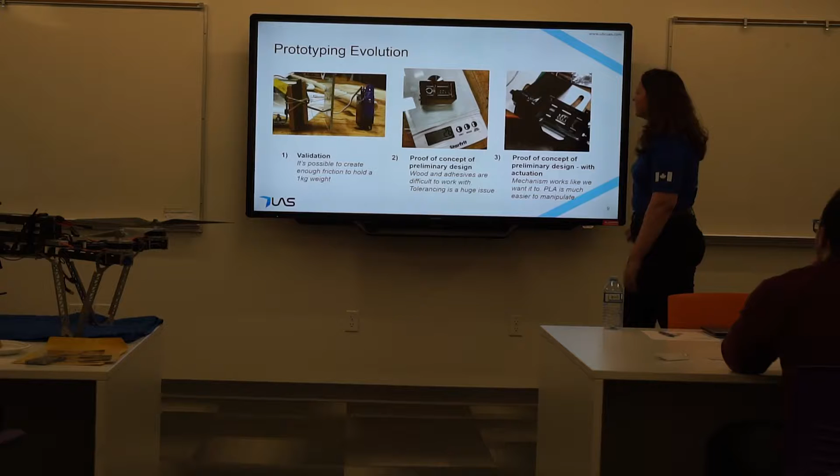Basically with the EPDM, it's actually the coefficient of friction, the static coefficient of friction is a little bit too high. Getting the point between it holding it and releasing it, we have to have the linear actuator almost fully released. So we have very little resolution. The spring's almost at the top before we have some sort of speed control.

And then with the acrylic, it's the exact opposite, where our coefficient of static friction was way too low, and we were getting it to release fully at about the 25% release mark. So we're struggling to find a material that's somewhere in the middle, but that's just going to be through testing out different materials. It's small enough and cheap enough to do through trial and error. Coefficient of friction is really difficult to determine, especially when we're constantly running ropes through it, because the abrasion is constantly changing the shape of it.

A note on abrasion and the rope we plan on using. We've tested out lots of different types of ropes of different thicknesses and materials, and our biggest concern is space and weight savings. Bigger, thicker ropes have a lot more friction, but they're a lot bulkier and heavier. We found that ropes and strings with circular cross-section were cutting into our pads and creating a groove for it to sit on, so there'd be no friction.

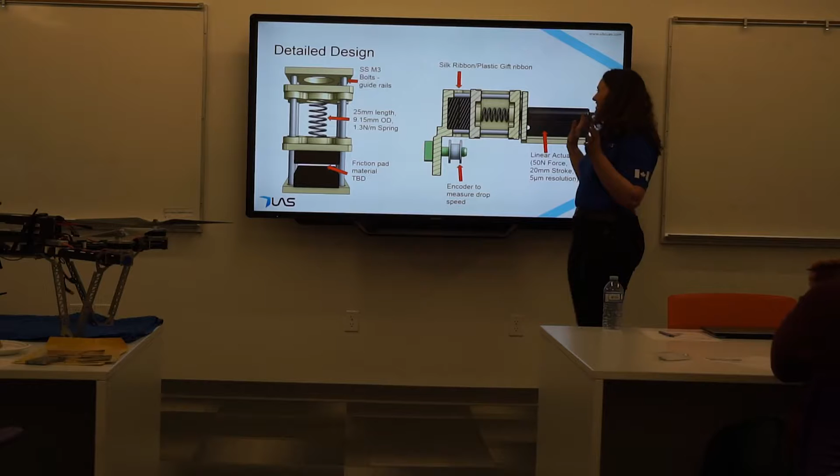The ribbon choice will also depend on what material we're using for the pads. So that's where we're going next - refining the materials, with lots of trial and error testing there.

Okay, moving on to the rover. The requirements here are a lot more restricted, so there's a lot less creativity and concept involved. Basically it needs to hold the 8 fluid ounce water bottle, since that's the core part of the mission. It must also have an average velocity of 8.3 centimeters per second, assuming we'd have 10 minutes to complete the go-to goal.

Once the rover is dropped, there's no restriction on it getting to its second location, apart from that it must be within the flight window, and it cannot travel more than 20 centimeters per second. So 8.3 centimeters per second would be the minimum we'd need if we're assuming the maximum distance we have to travel in 10 minutes. But we'd expect less distance and probably a bit faster.

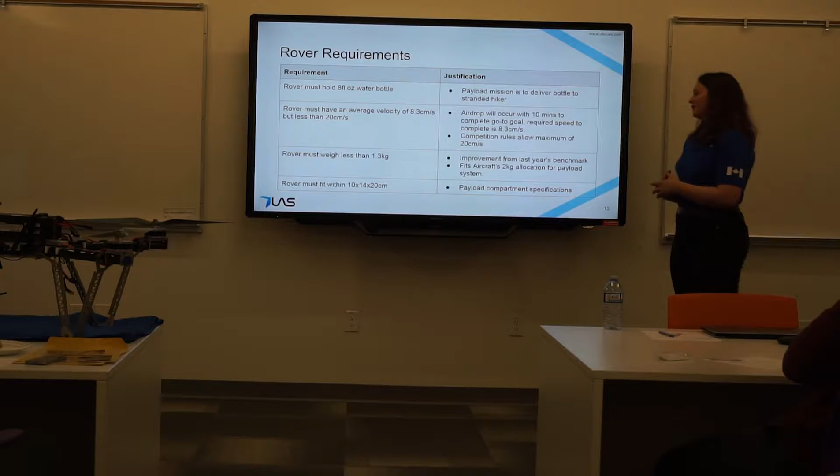The rover as a whole must weigh less than 1.3 kilograms - an improvement from last year's benchmark, which had a very similar rover drop situation. It also fits within our 2 kilogram allocation from the aircraft, and the rover needs to fit within 10 by 14 by 20 centimeters, which relates to the payload compartment you saw in the other presentation. It's quite a tight requirement, and it definitely ruled out most of our concepts.

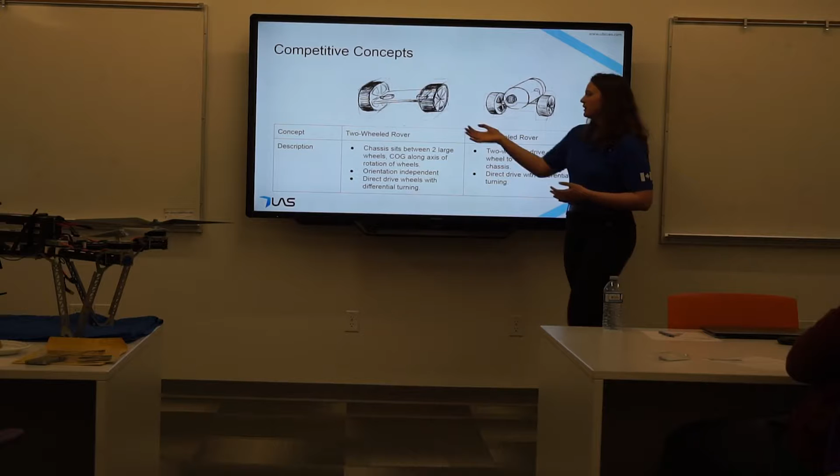So these are the concepts going in. This might not be obvious, but this is actually a 3-wheel rover with a little caster wheel at the back. The biggest difference between these is that they both have direct drive wheels and differential turning, but this one is balanced by the third wheel, which is free spinning, while this one is balanced by aligning the center of gravity with the center, which is quite a challenge.

So we're comparing the concepts relatively. The three-wheeled rover versus the two-wheeled rover - the two-wheeled is obviously a lot less weight and a lot less space, just because you're cutting out an extra wheel. You don't need the chassis and support material to attach that wheel, and the weight savings is quite significant, especially on that scale. In our very early prototypes, we're seeing maybe a 50% difference, or at least close to it.

Where it's weakest is that stability is quite a problem, because you have to make sure your alignment of the center of gravity is really robust. But we decided it's not actually a huge issue with drag - yes, we're getting less speed, yes it's quite a resistance, we might need even more power to account for that. But at the end of the day, if we can get to that second location, it doesn't matter if it dragged all the way to get there.

So the biggest factor of the two-wheel design that made it the winning concept was that it can land in any orientation, so there's no backward and forwards. And if you're cutting out all the turning that you need to do with differential turning, you're giving the compass less data to be confused by.

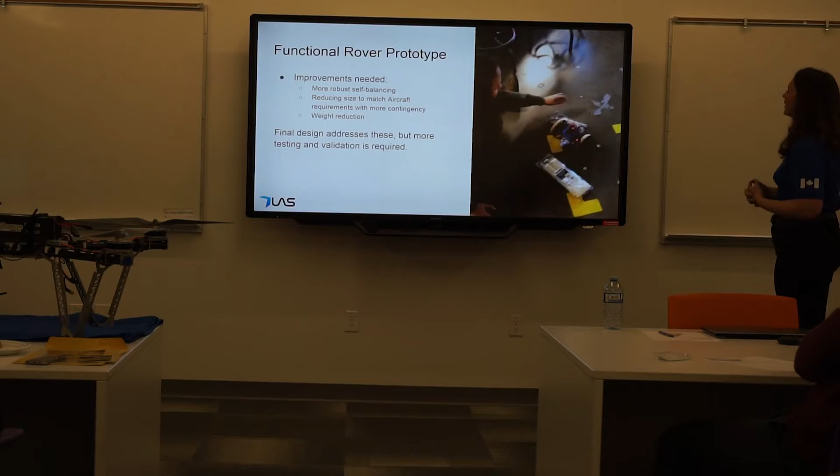We wanted to do big wheels to have all the weight below it to maintain the stability. It's very crudely balanced here. We've got the water bottle manually adjusted, and the electronics also manually adjusted, done by eye. But it makes it over big obstacles, and that's because the big wheels offer a lot more torque.

But there are a lot more improvements coming from here, we want it to be a lot more robust in alignment of the center of gravity. So the way we intend to do this is by having more rigid mountings. We also did some mass property analysis. We drew up the water bottle, gave it a density of water, and found the center of gravity of that, which will help align the center of gravity a little bit more exactly.

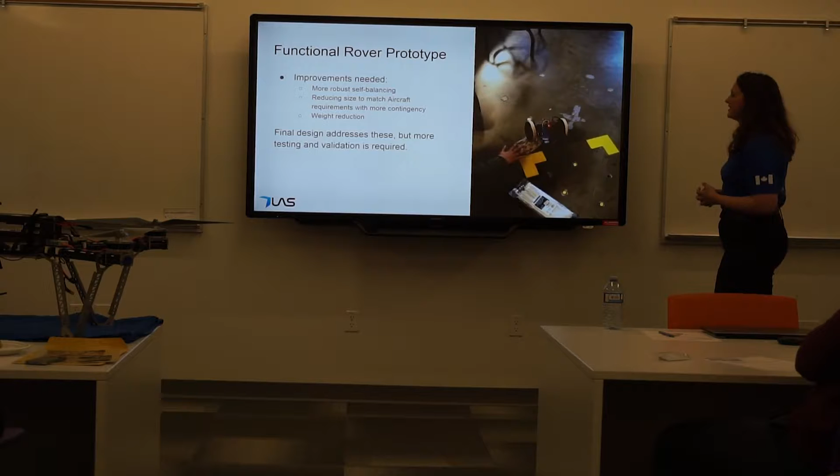We still have yet to make a prototype focusing on these improvements, so more validation will be needed for this final design.

You can see here that we reduced the thickness of the wheels to reduce the size. In the previous one, we had a plank of wood that the water bottle was zip-tied to underneath. So in this one, we wanted to move the water bottle up into the chassis a bit more for height savings. We also wanted to have the water bottle held in a more exact way. We chose to do these little arcs so we could cut it out of wood, and we have a lot of surface flat area to glue things together.

We have our motors at the bottom here—6-volt, 313 to 1 gear ratio. We traced back our required speed, which was 8.3 centimeters per second, and took the diameter of the wheels and used that to trace back to the RPM and gear ratio that we need. That's how we spec the motors.

We also wanted more rigid mounts. Similar to the water bottle just being zip-tied on, in the last one the motors were just glued on, also done by eye. So we wanted more rigid mounts with actual locating features. It's not very obvious here, but we've got some holes to locate where the motor should go, so it's a lot more aligned and there's no room for human error. We're also making mounts for the electronics to be a lot more stable, as low down as we can, and as rigid as possible.

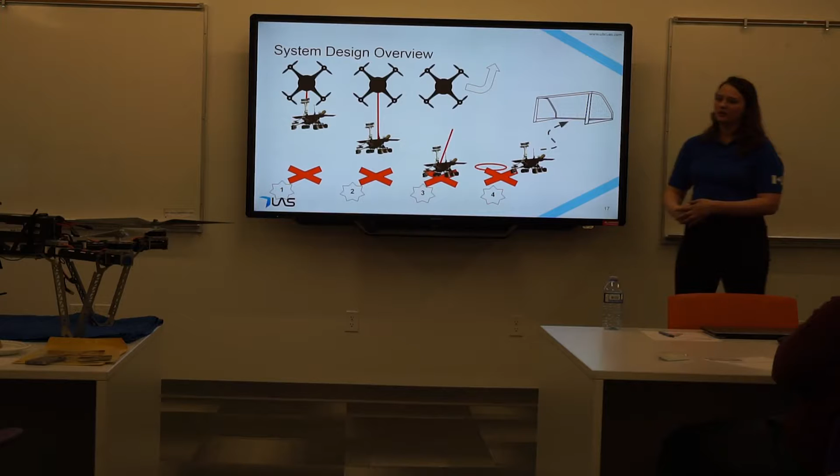Moving forward, the next thing we will do is integrate our airdrop and our rover. We want to make sure we can release the rope when it hits the bottom, and that there's communication between the two so the rover knows when it's on the ground. I think those are the biggest points.

The other thing is we want to do a lot more failure analysis, looking at the biggest ways it can fail. One thing a lot of teams struggled with in previous competitions, and ourselves in testing, was early deployment being a huge issue—you get docked points for anything falling off the aircraft when it's not supposed to be lowered. So we want to create a binary clamp on the drone that will only release once the rover needs to be released, once it receives the signal that it's in the right location. That way we don't require the winch to be closed at all times, only when it's in action, and the binary clamp can close it if anything is wrong. I think there's more failure analysis that will come with integration testing, but that's the big one we'll focus on next.

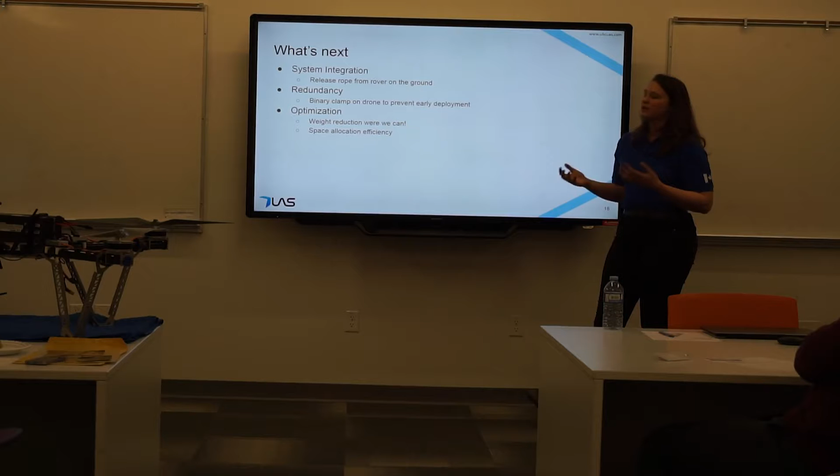The final thing is optimization. Anyone with experience in the aircraft industry knows weight reduction is everything. Although we're on track to meet the 1 kilogram requirement, we want to reduce it even more, because I believe there's a linear relation between weight savings and the efficiency of our aircraft. Another thing is space allocation efficiency—right now we're pushing the borders of the aircraft compartment, so we want some contingency so we don't have to worry about things getting caught as they fall.

Yeah. So, questions?

So how is it stored in this? Yeah, so that's the one thing I didn't touch on, part of system integration will be how everything fits into the compartment. These wheels are already at the maximum height, so our winch will hopefully sit within the wheels. The spool—we've got some space to store electronics, not finalized yet, at the bottom, as well as the flat area on top, but we're hoping to keep some real estate on top for a free spinning spool where the ribbon wraps around just to keep it untangled and out of the way. As it pulls through, it will just unravel—there's no motorization in the spool at all.